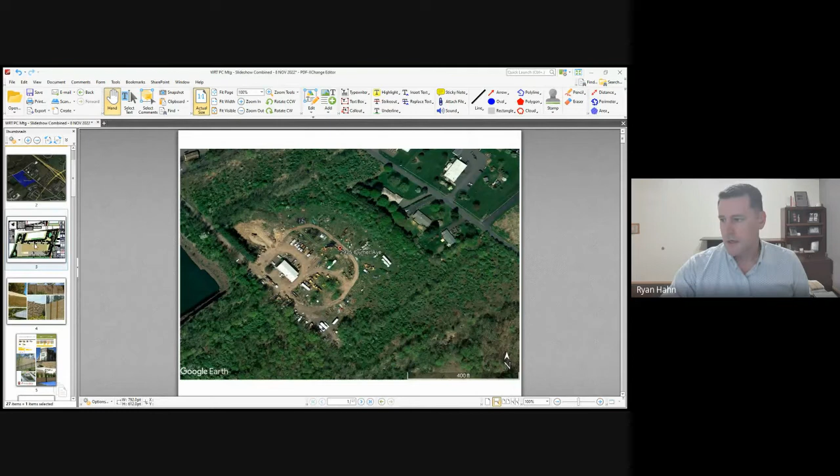So, and I'm sure it'll continue to be a hot topic of discussion, but just following our last reviews and discussion here, we've got residential uses to the east of us and to the north of us. And how do we enhance that buffering further? So I want to highlight two additional items here and how the outward appearance of this is relative to the township. So first and foremost, we're around this perimeter of the parking area on the east side of the site.

The SALDO requirement is to have a 4-foot tall berm with a 5-foot board-on-board wood fence. We previously showed and continue to show an 8-foot high fence around the perimeter. And I'll just illustrate that's not just around the parking, that's around this full perimeter. What was absent on that before and what's difficult to ascertain from these two-dimensional plans is the way the grades work here and how this site crowns in the middle and then falls off as you go towards Clymer and goes toward the south. So as a result of that, we were previously showing this berm, or the 4-foot high berm, extending a partial length along the residential homes here to the east.

The plan update that we've made since then is we've actually added some smaller parking lot facing retaining walls, which allowed us to extend the length of that berm the entire length of the parking lot. So I want to be clear that is on our revised plans, that will be on our revised submittal, and that's a commitment from us.

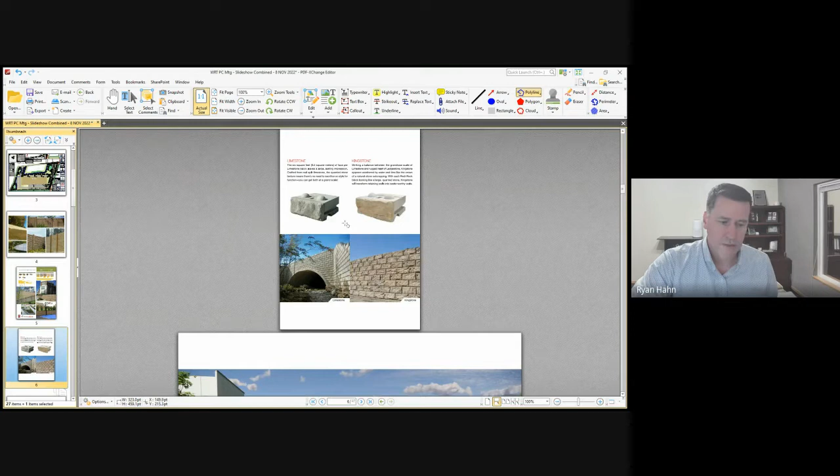I did want to throw out here in the meeting, especially as we get towards those walls, one additional option that we're open to if this is elected. What I've got up on the screen is what's called a Redi-Rock system. So in addition to the segmental block walls, this is a much larger module. This actually has what I consider a much better appearance once you get to 3 or 4 courses high, like shown, because these are actually the faces of 4 foot by 8 foot. So it looks much more like a cut limestone, locally sourced. So that's an option if that's of interest. But we'd be willing to put in a Redi-Rock wall along those higher elevations facing Clymer.

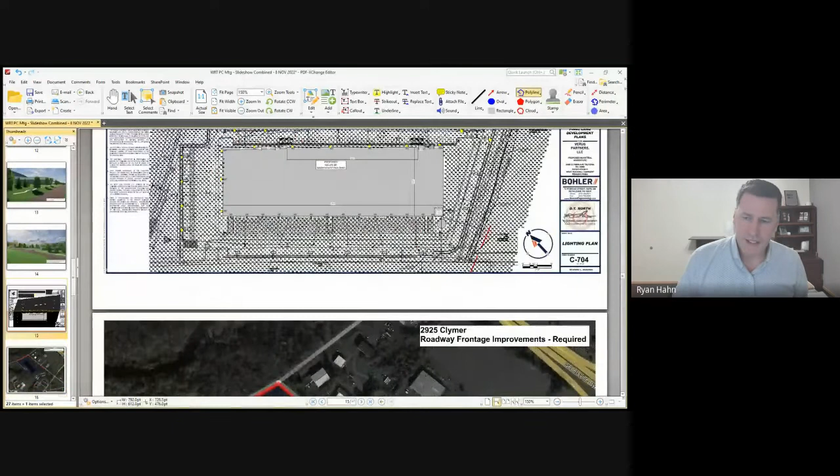I'll come back to those items in a second for your question, but we made some other changes just as it relates to the perimeter of this property that I wanted to go through. So the lighting plan, and I'm going to come back to these slides, the lighting plan on this property. So we've gone through several iterations, and where we started at the beginning of the year is what we felt was a compliant lighting plan.

All of these light fixtures had a horizontal type cutoff lens, and that's designed to prevent propagation of lighting across the property line. Subsequent to that, and in response to technical comments, we've added light shields to all perimeter lighting fixtures on these property lines, which not only helps stop any lighting propagation, but the glare from those fixtures is reduced.

Following our last presentation, I went back to our lighting designer. This is actually something that I learned was available out here, but how can we reduce this impact even further? And one of the things, and this is in that commitment as well, we've added in here what's called an nLight. It's by Acuity, a lighting control system. And what this does is, I've highlighted all the yellow fixtures that this would be applied to. What this does is this makes the normal operation of these lights at 25% of their full level.

Then they are actually triggered by motion, because our biggest concern about having the lighting was for security. These are triggered, whether it be vehicular or pedestrian motion, to their normal lighting level. So the normal operation, in addition to the cutoff lenses, in addition to the light shields, is to have these dim to 25% of their operation. And this is more than just an occupancy sensor on a lighting fixture. What this allows is that all of these lighting fixtures have the ability to be controlled instantly.

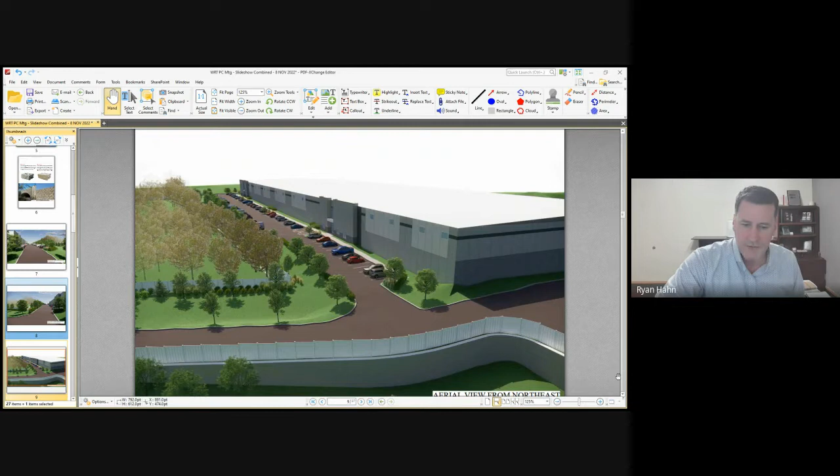We also created one, this is from the same location, but facing towards the southeast. So you can get an idea of how this is oriented. This gives an overall view of the parking lot, the location of the residences. Obviously the truck maneuvering, everything was oriented to the opposite side of the building.

This is the same view from the opposite side. So you can see that starting to angle away and where the barrier is relative to the existing and proposed vegetation. This one is actually from Clymer, just so you understand. This white line is actually the property line, right-of-way line. That's what that's intended to illustrate.

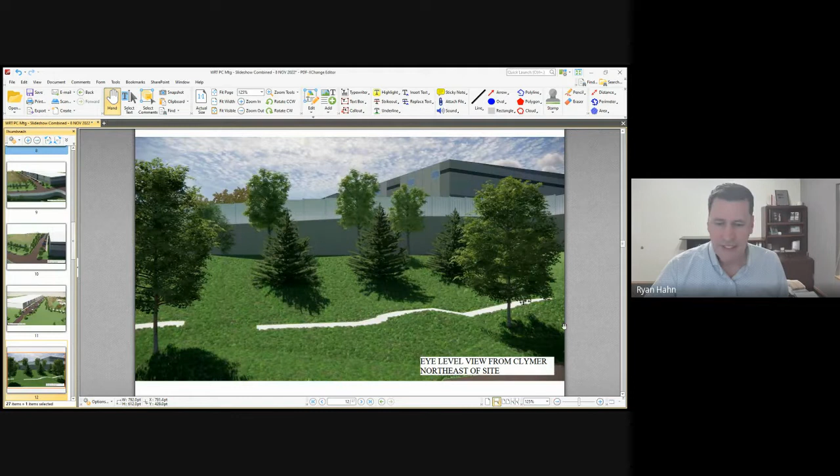So this is near the stormwater basin at the northeast corner of the site. This is looking down Clymer, so this gives a good idea of where that Redi-Rock wall would make a much nicer presentation along that perimeter along Clymer. I'll qualify these little humps here are an anomaly. Our intent is not to have an off-road course here on Clymer, obviously.

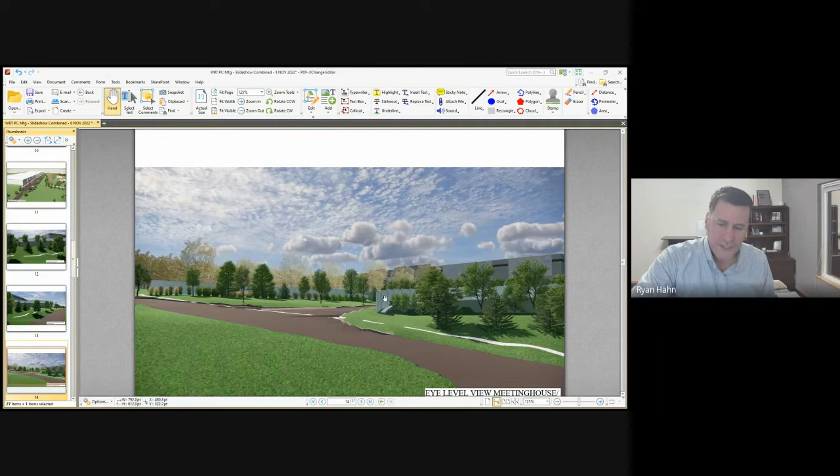And then the last slide is just an entrance elevation at the north entrance to our property, showing those two fence lines, retaining wall line, what this does screen, what this doesn't screen, relative to the roadway. So again, a lot to digest there, but I'll pause there just for any questions you have or comments.

I have none at this point. This is Alex, nor do I. Okay. The next, go ahead.

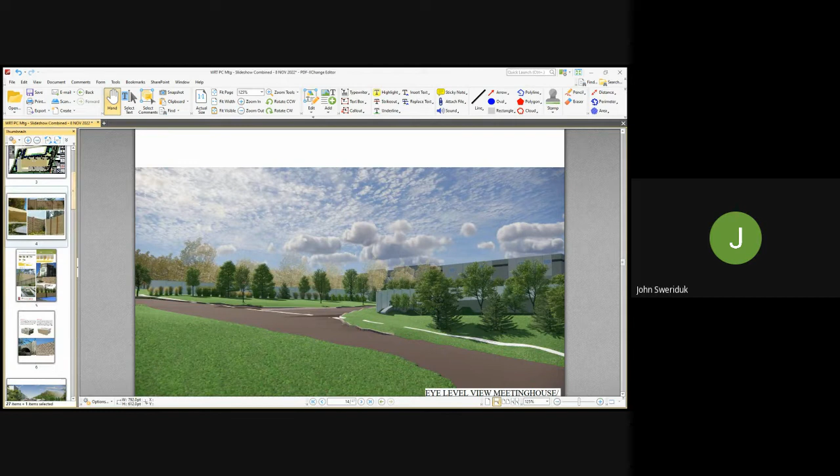This is John Sweriduk. The sound barriers that you're proposing here, are they similar to what we see along highways like the Pennsylvania Turnpike? They've installed a lot of sound barriers as they've been doing widening of the turnpike. I don't know if you're familiar with what product they use, but is what you're proposing here by any chance similar to that?

I don't know the specific instance that you're referring to. I can tell you that I know for a fact that the SimTek and the Plywall that's shown on here have been used by PennDOT in the past. Sometimes when you get into a taller elevation, 12 feet, 16 feet, 20 feet, we're talking about a different product altogether. It's actually a precast concrete with steel support posts. That's what I do see commonly when you get into the higher elevations along the highway.

The disadvantage of that is that you're limited, similar to the retaining wall block, in color selection. I mean, it's a precast concrete product, but I don't know if that answered your question. But if you have a specific location, I'd be happy to confirm that. It looks similar, and based on your description, it sounds like it's a similar product. Thank you. You're welcome.

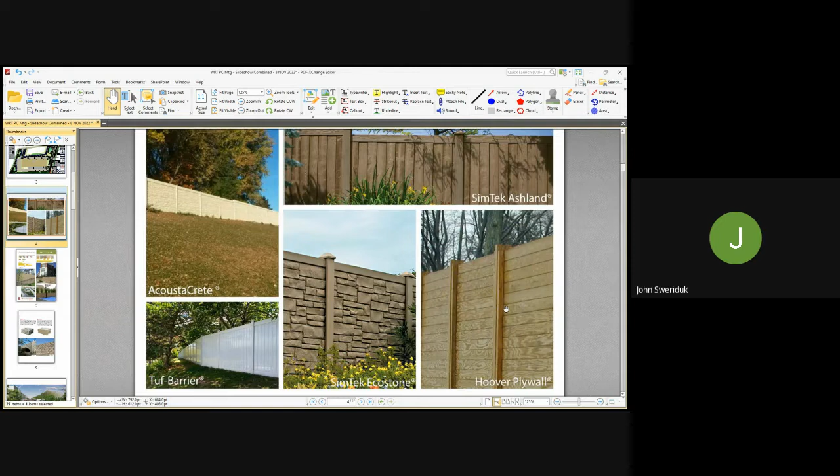The other item I wanted to talk about here, just because this has been a big topic, is an update on where we're at on traffic improvements. So just this first sheet, I wanted to highlight what is required by the SALDO, and it's the frontage improvements along this property line. Matt will hit on this later, but 3 of the remaining waivers relate to improvements along Clymer relative to the offsite improvements that we're showing along Meeting House Road and then the intersection at Meeting House Road and State Road 152.

So this is the improvements to the 14-foot wide cartway frontage along Clymer and then the 2 portions that are on Meeting House Road. So that's the requirement. This is an update on what we're showing in terms of the improvements, and there have been a few iterations since we last presented here. So we're showing, and I guess I'll start with Clymer. Clymer isn't being completely ignored.

We're removing the access point that's existing, where this property currently accesses Clymer. That's being removed in its entirety. We did modify the entrances on Meeting House, not only with an island, but signage. We don't anticipate any truck movements towards Clymer, but just to further discourage the accidental northbound turn exiting the property.

So that's been updated as well. And then along Clymer itself, there are 3 existing roadway culverts that run underneath Clymer along our frontage. We are replacing those culverts and then regrading the frontage to provide a 2-foot grass shoulder, and then regrade the drainage along the north side of Clymer. So there are improvements along that other than the roadway.

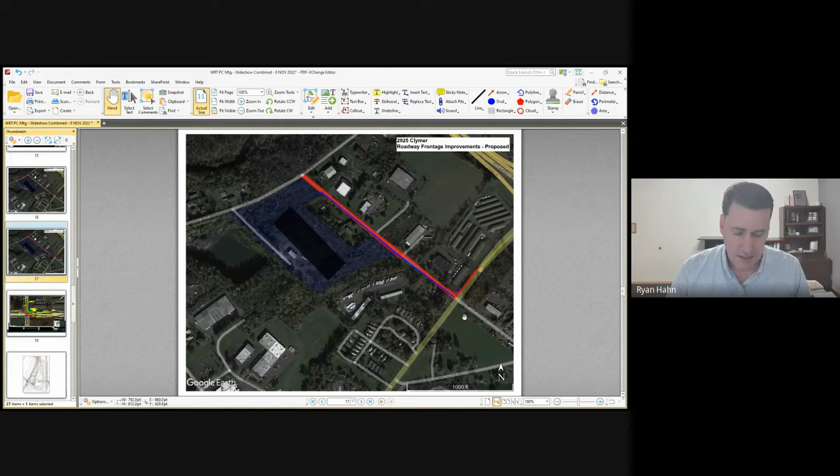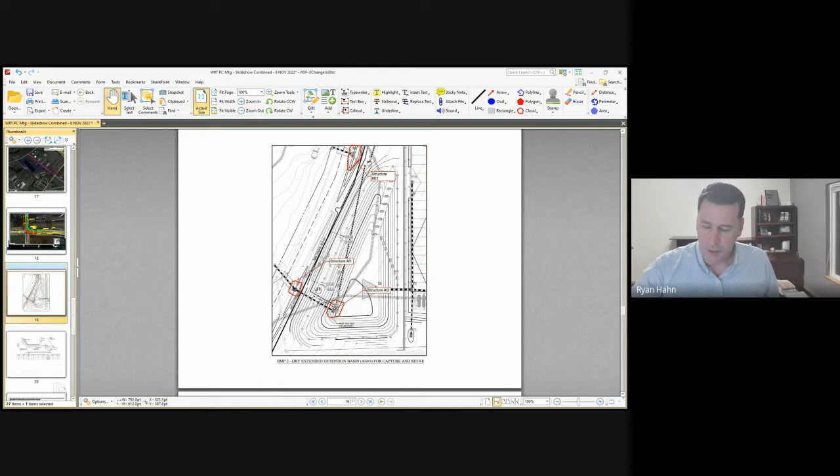Lastly, and I'm sure several of them will comment here tonight as well, but we've made multiple efforts to reach out to all adjacent property owners to this site. Obviously, we've had discussions with GA Peak, our neighbors to the west, the Vogels at Rock Hill Storage. Mr. DeSantis was kind enough to spend a couple hours with me and our engineer, Justin from Bohler, on reviewing his stormwater concerns to the north side of this property. Hopefully he feels the same way, but we had a productive discussion and we have proposed to him some additional improvements. I've outlined those there.

This is obviously subject to technical approval, but this includes adding capacity to the stormwater management basin opposite his property. So adding additional emergency capacity beyond the DEP or township requirements, adding some additional sumps to these structures and screens to these structures to prevent errant debris, leaves, things like that, potentially entering the storm sewer and coming across the roadway.

So I know everybody loves hearing a developer speak for a long time, but I guess with that, I'll turn it over. One of the comments was, what's the benefit to the township for this project? I won't dwell on this for too long, but I do want to have David Babbitt, just an outside consultant that we've engaged. David, are you here? I am. Can you hear me? Okay. Yes. So David performed, just to give a general idea, the perpetual fiscal impact of this investment in the property. But David, if you could spend just a couple minutes just going through that analysis, which we've provided as well. All right. I'm not sure if everyone has a copy of it, but there's 2 big spreadsheets.

This is for the township. The top panel shows the number of square feet, the assessment per square foot, $6 per square foot, which is based on comparable new distribution centers in Upper Bucks County. The assessed value comes out to about $1.1 million, which is a little more than 1% of the total assessed value in the township. The number of workers is projected to be 119. The annual township expenditures is projected to be shy of $14,000. In my view, that's a little bit overstated, but that's just a problem with the methodology. It tends to overstate municipal expenditures having to do with relatively small non-residential development.

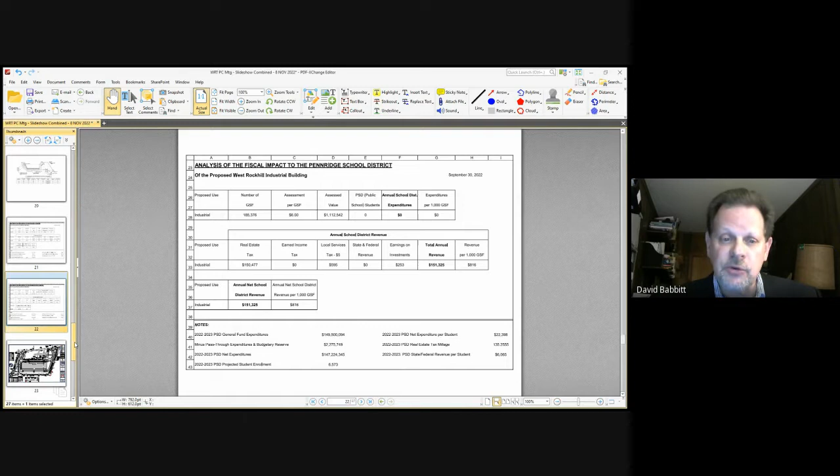If we can move to the school district spreadsheet, it has the same numbers on the top, except for the fact that there obviously are no school district students, so the school district expenditures are zero every year. The school district revenue, the vast majority of that is the real estate tax at about $150,000. The school district does get $5 per person, so there's almost $600 in local services tax revenue and some earnings on investments, about $151,000 annually for the school district. And obviously, since there are no expenditures, every dollar of that revenue annually becomes surplus. And together, we're looking at about $156,000 of surplus each and every year to the township and the school district combined. That's the brief version. I'd be happy to answer any questions if you have any.

I have none. Greg, these numbers work for you? As in, do they seem accurate to you? They seem accurate, somewhat accurate, yes. Okay, thank you.

Anyone have any questions? This is Alex. I don't. All right, why don't you continue?

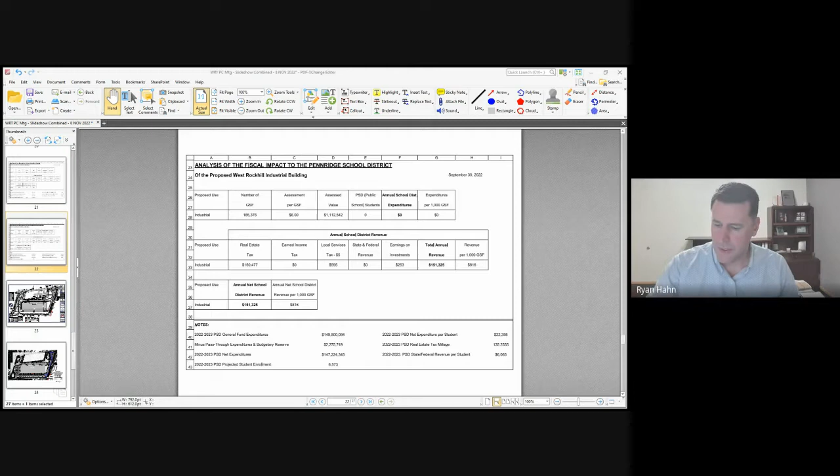Okay, and last but not least, Matt, if I could turn it over to you and just go through, I guess, the front end of this, the updated waiver letter. Sure. Good evening. My name is Matt Chartrand. As Ryan had mentioned, I'm with Bohler Engineering for the engineers working on this plan.

And as was mentioned previously, I think, when you saw this application come before you, we had a more extensive list of waivers that we were asking for relative to some unique spaces and issues that we had around the site. We've tried to work through as many of those issues as we could to reduce this number of waivers that we're asking for.

And we think that what we're asking for now, given what Ryan and David had gone through, with the positives that this project can bring to the township, we feel that this is the minimum relief that we would need in order to facilitate the development. So Veris Partners had put together a letter dated October 3rd that outlines those waivers. I'll run through them as quickly as I can. And then again, if there are particular items or discussion items that you want to go over.

There was also a letter that we received from Wynn Associates dated November 3rd, which speaks to some of those waivers as well, whether or not they were in agreement with, or if they had any additional comments. So if you have a copy of that, along with the waiver letter that Veris had sent over, that'll give you a better picture on what we're looking for here. So again, going back to the October 3rd letter that outlines the waivers that we're looking for here.

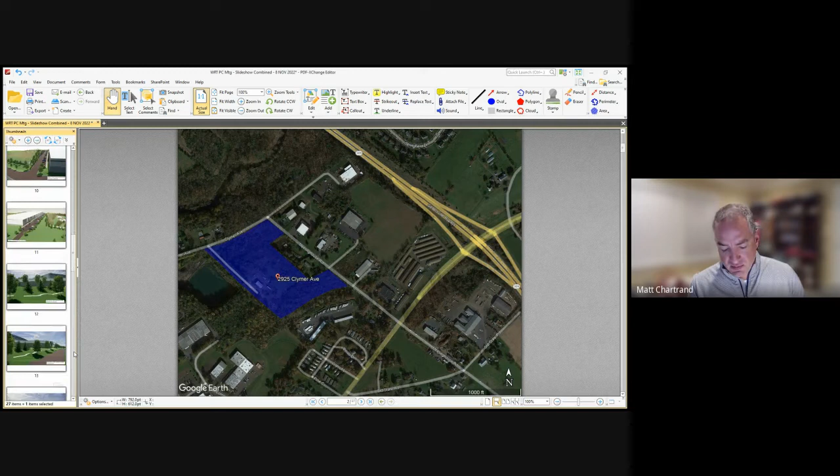Matt, can you hang on one second? Just going back to your first waiver request. I know we had discussion on this at previous meetings, and there was some geographical term that we were using that could be used to represent your property, and I forget what it was. I think Alex, you had brought it up. Yeah, that was LiDAR. LiDAR, that's the one. And I think we were willing to be accepting of that, if my memory serves me correctly.

Yeah, and LiDAR information provided via a GIS system, we can certainly download that information and bring that in. That would give us some elevations if we needed them, to certain offsite areas. And we do often look at that if we're trying to take a look at offsite drainage or things like that that might be coming through. We do believe that we've captured that within the area that we have right now with the survey and the information of what's coming there. So from our standpoint, we do capture that.

And on an exhibit, we additionally do have some of that LiDAR information. So again, we're not really looking at this as a situation where we're necessarily trying to cut corners. We just want to provide the information that's relevant to the site development itself. And we do believe that we have shown that within the plans. Okay, understood.

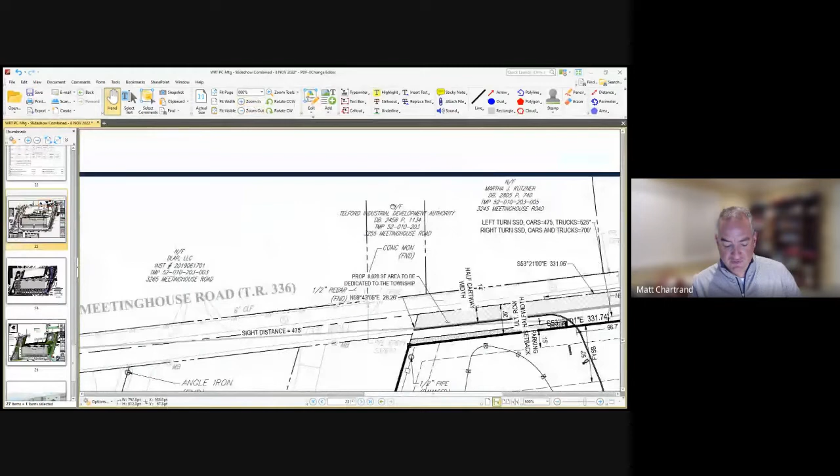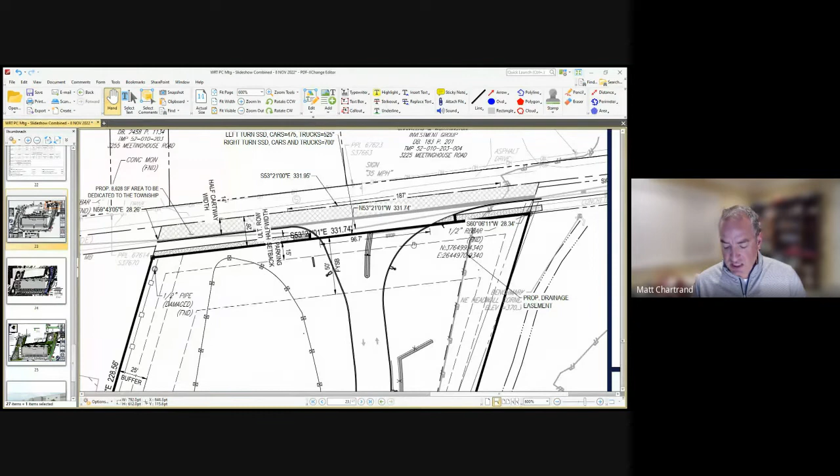The next waiver is a partial waiver from section 308.C. That's in the stormwater management ordinance, and that's from the requirement to provide storm sewer piping that's reinforced concrete and at a minimum of 18 inches. So on site, what we're proposing is to use a high density polyethylene pipe. This is more like a plastic corrugated pipe, and is very typical for use within these types of facilities. We use them in industrial facilities, commercial facilities, things of that nature. Typically reinforced concrete pipe we would use for sections out in state roadways where it's required. But for on-site, in terms of ease of installation and minimizing maintenance, the HDPE pipe is becoming more of an industry standard.

And then in terms of the size at 18 inches, basically everywhere around our site where we're conveying, say from inlet to inlet, we maintain that sizing, but there are some areas where our roof drains connect from the building where it would be smaller than 18 inches. And again, going from the letter from Wynn Associates, I believe that as well was a waiver that they recommended in terms of the size of the pipe.

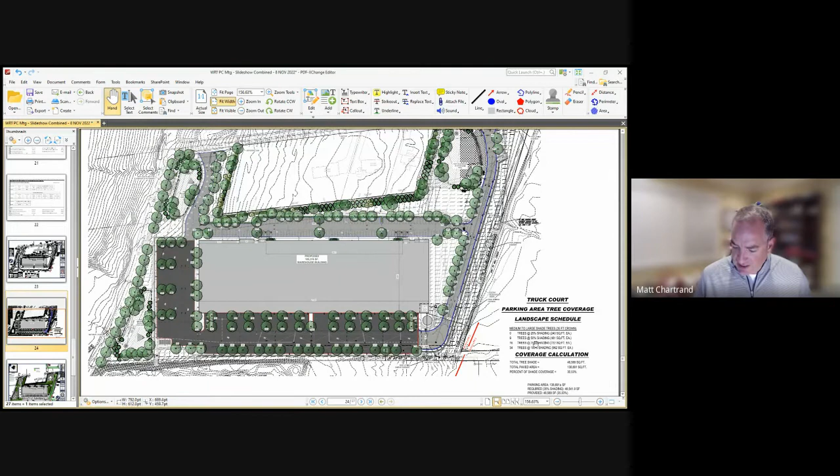Matt, how many trees are you actually planning to plant for the shading? Let me see if I can get to that. And I apologize, Chris, because I don't have that immediately in front of me here. Let me see if I can get to my landscape plan. Let's see if that calculation is shown on there. Sorry, it wasn't on the first plan that I pulled open. We have another plan within our set that specifically refers to the shading.

Yeah, I'd be curious to see where you are planning to plant them as well. I know we've given partial waivers on this before, but we've worked with the applicant to make their best effort to plant as many trees as possible to perform the function that they're being required to be there for. Sure. It looks to me that, in terms of the landscape schedule relative to shade trees, which would have a total crown of about 35 feet, we've got 48 trees that are being shown around our site right now. Overall, that yields a percentage of shade coverage of about 11.5%.

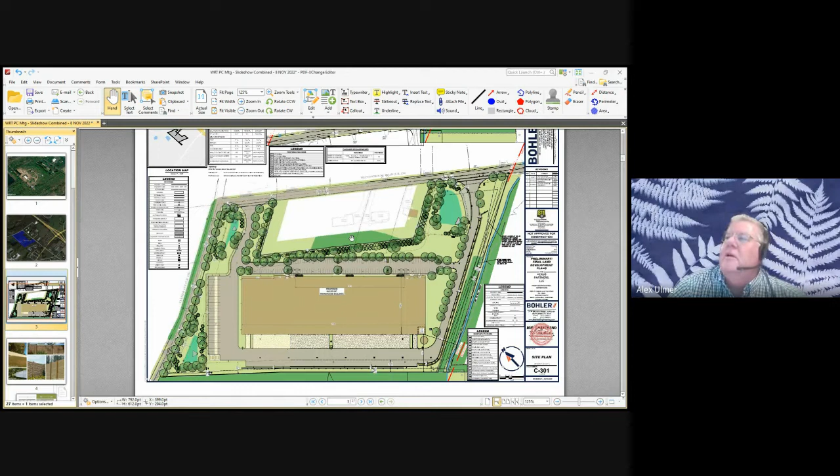I don't, and like I brought up, we had discussion about that, and it sounded like we were going to be all right with it. Yeah, I guess this is Alex. My only question is there a reason the LiDAR wasn't added to those areas within 100 feet of the property? I apologize. We do have LiDAR shown on an exhibit. And again, if there's additional LiDAR information that's needed in order to be able to cover that, we're happy to provide it.

Okay. So what I'm hearing is with the addition of LiDAR, that the planning commission is comfortable with the level of detail provided. Not hearing any objections to that. Yeah, we'll move on to number 2. I'm all right with it.

So number 2, similar to what Matt had discussed, is a combination of the road improvement question in general. So standard road improvements in the township are cartway widening, curb and sidewalk along frontage of property. As discussed earlier, what they're essentially asking for is a partial waiver to not install standard cartway widening, curb and sidewalk along Clymer Avenue, just do the shoulder and swale improvements, but utilize those funds to do a more complete widening and off-site improvements along Meetinghouse Road, essentially the entire length of Meetinghouse Road.

And as they indicated earlier, we have gone back and forth on this. I did meet on site with representatives from Bohler. So I think we made a lot of progress on that, and they're committing to the 28-foot width, the entire length. So I think that accomplishes what we had talked about in prior meetings for improvements for access to the site. So question back to the planning commission is, is that concept generally agreeable with the planning commission?

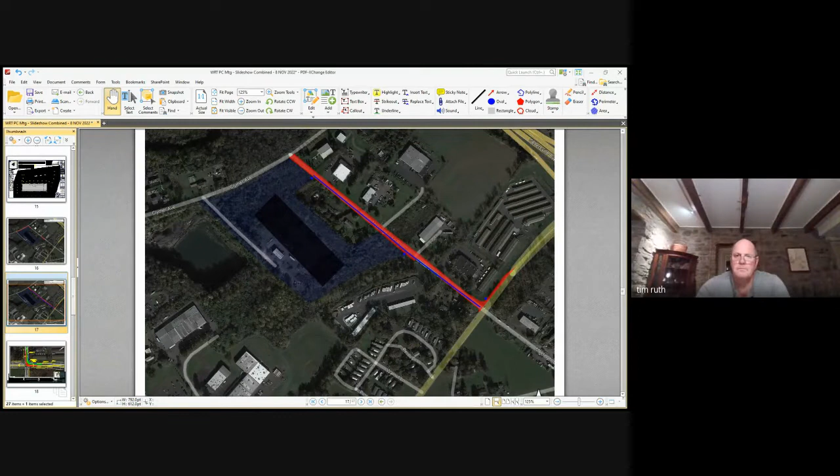Okay. Ryan, this is Greg Yeager. Ryan, sorry to chime in, but we've done that number in other projects. We have those estimates and they're on the order of 3 to 4 times the value of the improvements on Clymer. Okay. I'm not surprised by that number.

Thank you. So the width that was going to be choked down in front of the contractor services, that is now going to be out to 28 feet. Is that correct, Ryan? That's what you had indicated earlier? That's correct. There were actually 2 areas. There's the area where we had to modify that sanitary manhole that you and Adam walked on the site. I just wanted to make sure that was clear, that wasn't shown on the previous plan, but we would commit to doing that. And then there was a 26-foot width in front of these, just between the 2 driveways.

But you did provide some of the land development plans showing the availability of ultimate right of way. So we've since updated that to show the 28 feet as well. So the whole length of Meetinghouse from State Road to Clymer is going to be 28 feet. I believe so. That's correct, Matt, right?

That's correct. That's what we're showing. Right. Okay. Now, just so everyone's clear, it's not exactly a clean one end to the other straight 28 feet because we're working with what's out there. So sometimes it might shift from one side to the other a little bit. I doubt you'll even notice it when the job is done, but it's not just adding width to one side of the street and going entirely down. I worked with Adam to fit it in amongst all the improvements that are out there and make it work the best.

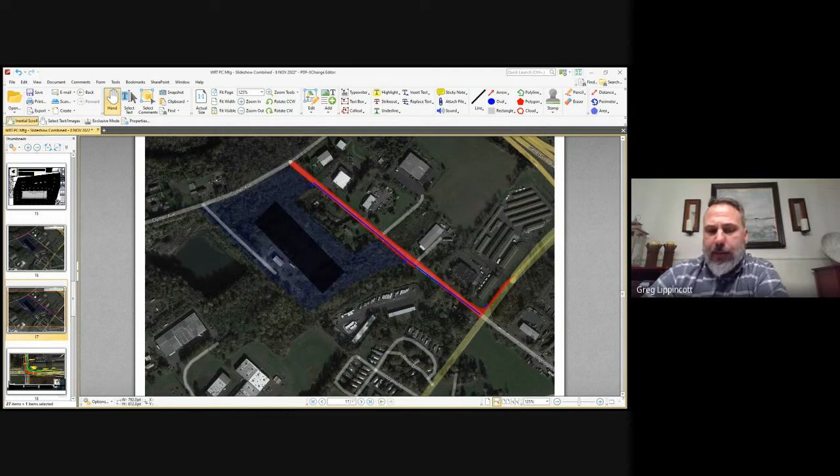We do not have a mandatory connection. If they sell their property, don't they? Or am I wrong? No, there are certain sections that do, but it's not in this section. There are sections like in the Ridge Road area for the sewer, but not in this area. If they had a failing or substandard septic system, when they would try to sell their property, they would probably have to connect to sanitary sewer. But there's no mandatory connection right now, or for water. Okay.

All right, and then I do have another question about a bullet point before. I don't know if you want me to ask this now or not. It would be directed towards Ryan, the concern about the lighting on the street. Can we wait till we get to that one, Tony, so we can finish this? I'm sorry. That's all right. Sorry, I jumped the gun.

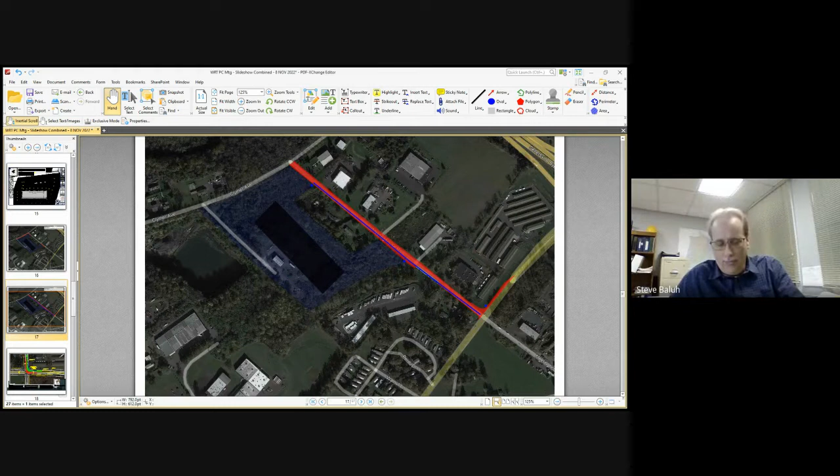No, not a problem. So are there any other comments regarding the street improvements or the partial waivers based on the extended improvements on Meetinghouse Road? I know we had discussion about sidewalk at one point. Does contractor services have sidewalk in front of the property? Yes, and I believe the last plan I saw, you were extending the sidewalk from contractor services down to the new entrance. To the southern entrance. To the southern entrance, yeah.

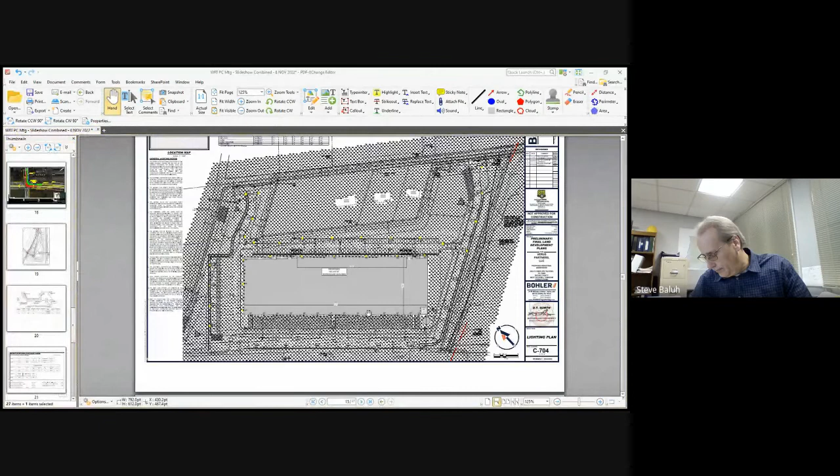Is that correct, guys? I believe we're showing sidewalk correct, and I believe we're also showing sidewalk on the north entrance. So you have sidewalk between the entrances as well? Not along the frontage of those residential properties. We are showing it along our frontage to that edge, and then widening of the road all the way along the frontage of those residential properties, again within the limits of what we're working with the right of way.

And then you can see in that kind of hatch pattern there where the sidewalk picks up again, and it does look like it ultimately connects to where the terminus is of the concrete sidewalk from the contractor services site. All right, so that would be sidewalk along the frontage of Meetinghouse, their own frontage, with a connection to contractor services. There is not adequate right of way to do sidewalk along the residential properties. Okay. All right, that's my last question.

Okay, I guess we should move. Oh, yeah. Is there another? Yeah, in my opinion, this is what we had talked about before, and this is what they're showing to us that we had looked for. So I'm comfortable with it. This is Alex, as am I. John, I agree. This is Andy. Sounds reasonable. Tim, I agree as well. All right, go ahead. Okay, Steve. I guess that's everybody.

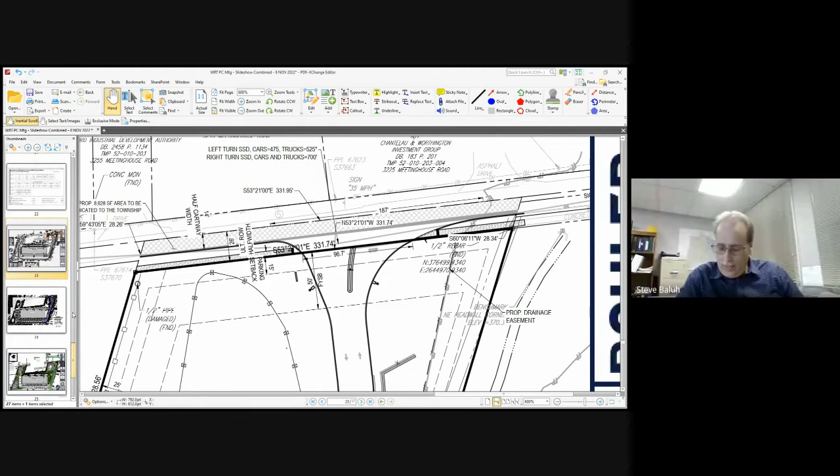So my third item is their item 5 from the Veris letter. It's a discussion of the 3-to-1 to 4-to-1 slope issue. I guess what they provided was an alternate plan grading the site at 4-to-1, which ultimately the change is that the retaining walls get higher, and they modified location of the truck storage, sort of flipped it from the outside of the loop road to the inside of the loop road. Correct me if I'm wrong, guys. That's more or less the extent of the changes on the site with the 4-to-1 slopes, correct?

Yeah, those were the primary changes that we made. It didn't affect anything else in terms of the parking or the building or the main truck court areas, but it did, like I mentioned before, and you just mentioned as well, Steve, just increase the height of the walls that we would need to place there in order to meet that requirement. Okay, and just so everyone's clear, what is Veris's preference? The 3-to-1 slopes with the original plan, or this alternate plan with 4-to-1 slopes?

Our preference is what we've shown. What this plan is intended to illustrate is that this doesn't affect the building size or the coverage. We would just do a slightly different layout. I think the positives, we get a generally more gentle slope on those basins, but it increases the footprint of those basins by nature of the slope, and then increases the height of the retaining wall. So that's what you have to balance here.

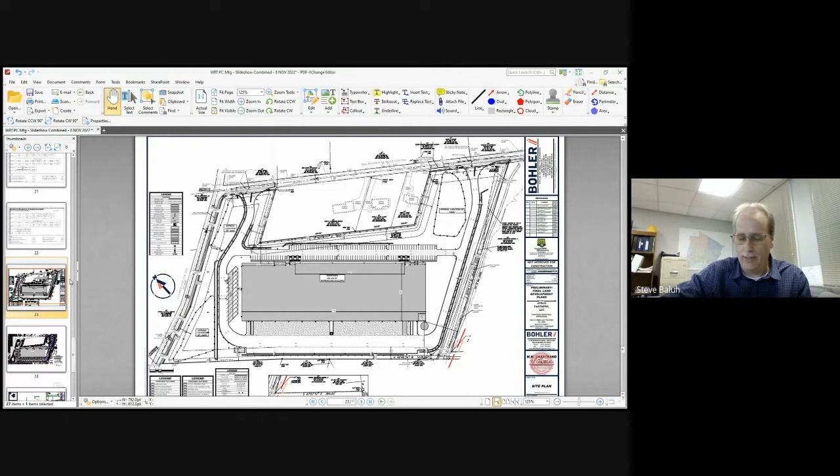Okay. All right, thank you. So I guess what we get back to is the question of, is the planning commission comfortable with them proceeding with the 3-to-1 slopes, with the retaining walls and structural engineering and the geotech report as we just discussed? Personally, I would rather see a lower retaining wall.

Could I just clarify there that the retaining walls grow in height with the 4-to-1 slope, not vice versa? Because that grade is shallower, so to make up that differential, we end up with a higher wall. Sorry to interrupt, but I just wanted to make sure that was clear. No worries. Yeah, thank you. So yeah, if I had to make a choice here, I would want a lower retaining wall. And seeing that they can build this within the ordinance at 4-to-1, I would opt to go with a lower retaining wall at 3-to-1.

I guess my thought, Chris, is they're still having to get a waiver for the height of the retaining walls. If they were to reduce the building size, could we reduce the height of those retaining walls? Even if it's not fully to ordinance, at least something a lot closer. I think that may also help with the afforestation issue. I'm not sure what you mean, Alex. That they don't need a waiver for the height of the retaining wall. I guess a ramification of the waiver is the height of the retaining wall. I thought there was a requirement for no more than 4 feet on a retaining wall.

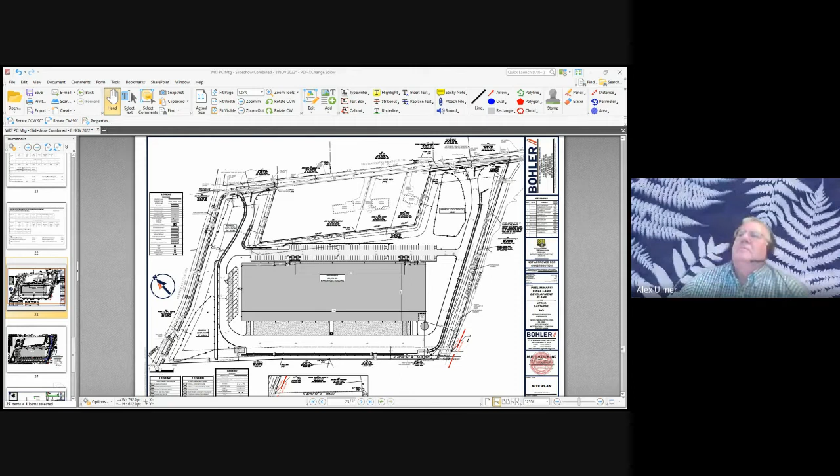So yeah, this is Tim. My thought would be if the site can be accommodated within the ordinance, but yet a waiver on the 3-to-1 versus 4-to-1 would be a reduction in the height of the retaining wall, I would be more for that as well. This is Andy. I agree with Tim and Chris on that. John, you have any? This is John. I'm fine. I agree with what was said. Okay, thank you. All right, Steve, go ahead.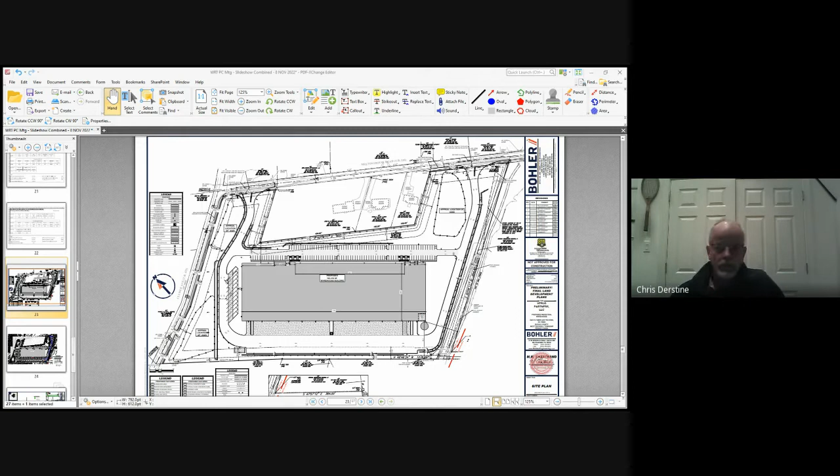Okay, that brings us to a much easier one. My item 4 has to do with the driveway width. I think they've proven they need the additional driveway width to make the truck turning movements, so the trucks aren't swinging out, blocking both lanes of traffic to get in and out of the site. That's essentially why they need those large return radii. Going back in time, I believe one of the reasons that we had these limitations on driveway entrance widths is so we don't end up with the old-fashioned gas station or convenience store that just paved the entire frontage of the site out to the road and people could drive in and out wherever, without controlled entrances.

So I think these are the smallest entrances that they could do and accommodate the truck traffic in a safe manner. Gotcha. Is everyone all right with that item? I am all right with that. Go ahead, John. I'm sorry. How do you discourage trucks from making a left-hand turn coming out of this exit that's shown?

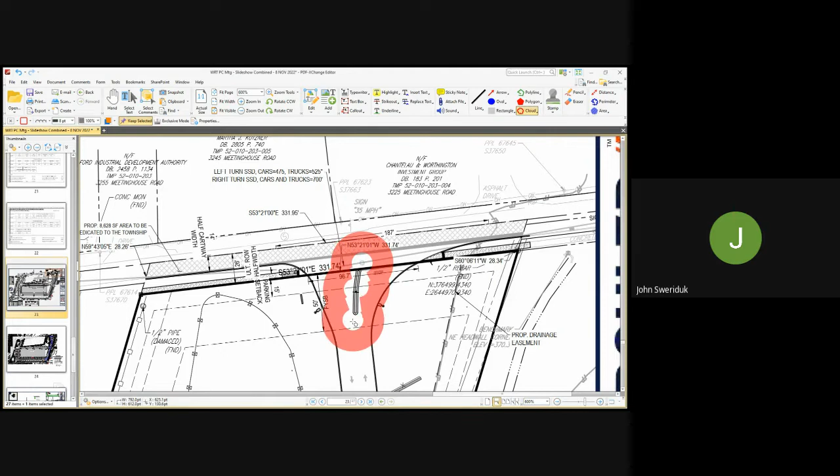Yeah, so you can see what Ryan just highlighted there. There is a mountable concrete island that's now placed between the incoming and outgoing traffic, and you can see that island itself is somewhat skewed towards sending the traffic to the right.

And obviously the curb line that follows as well as you're heading to the right allows for the truck to make a much easier turn and movement in that direction. Certainly, we think vehicles that are going to be servicing us and coming to this site will be coming off of the state highway and going back that way as well. So that's what we've done to try to facilitate that.

Obviously, there is still an ability, if needed, to make a left there. If it was vehicles or workers coming to and from the site, they would be able to make a left if needed. Emergency services would be able to make a left if needed. But in terms of truck traffic, we've really done everything that we could here to try to skew this and sort of encourage, if not force, the right turn movement.

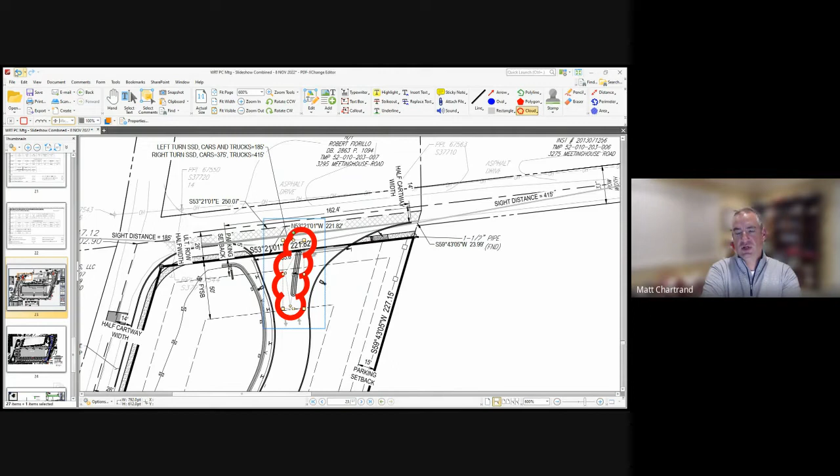Will there be signage out there that those trucks leaving can only make a right out of your facility? There is signage that's shown within that island. I don't know exactly what's shown on that post. Ryan, do you have any concerns about showing it as a complete restriction? No, and frankly, going that direction is a wrong turn for the trucks, so it doesn't benefit us to have trucks maneuvering that way either. There's no reason for them to be going that way. Unless the other way was blocked. Right. But I don't have a concern restricting that on truck movements.

Matt, are you still proposing that this is a 24-hour facility? Is that what you're saying? Ryan, do you want to speak to that? Yeah, we're proposing not to have a restriction against that, is the way I would phrase it. All right, so that would be a 24-hour facility. Okay. I don't know that the users will operate 24 hours, but in terms of a leasing restriction, it'd be consistent with the zoning ordinance here. So I'm not trying to mince words here, but it's just not adding a restriction to the hours of operation. All right, so we could say that it would be 24/7. Okay, and then I have another question too.

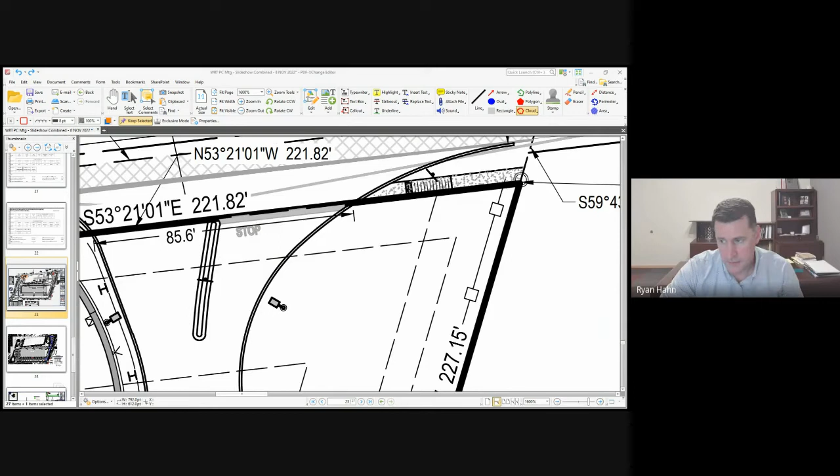In regards to the street lighting as well, we talked about this earlier, but the street lighting at those 2 entrances on Meetinghouse Road would be lit 24/7, is that correct? Yes. Okay, because we talked about earlier that there would be motion lights and such on the property, but the lighting would be lit at those entrances and cast light on neighboring property. Would that be correct? No, those poles would also have that lighting control. I mean, we have flexibility on that, but we propose that all those poles along that driveway would also have that. In addition to the shields, in addition to the cutoffs, they would have that light control system.

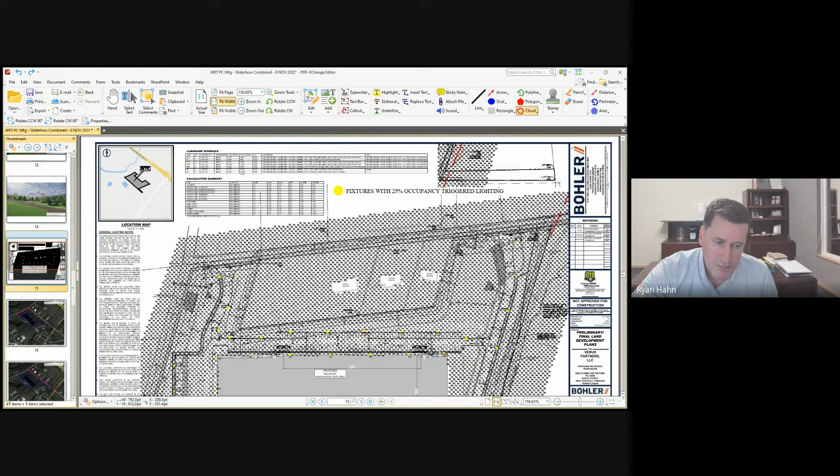So it's hard to see on this plan, but all of these yellow light fixtures. I mean, it's somewhat of a balance. You want people to be able to see the entrance and not miss it, but at the same time, recognizing any potential light pollution. But our going-in intent would be that those would be at 25% lighting level under normal operation.

Right, well, there's concerns with the residents that in the event that they miss the entrance, now they're continuing on down to Clymer Avenue and there's no improvements to Clymer, and now you got tractor trailers down there. That's always a concern. And that's why I was asking you about the lighting.

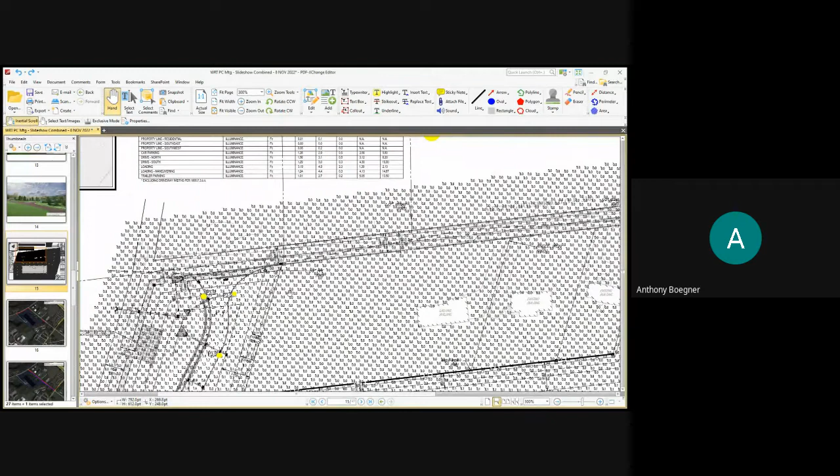If you wouldn't mind, I just want to clarify, because you mentioned the residents. If you zoom in even a little bit more on that driveway, Ryan, I just wanted to make note that the only area where there's even minimal light spill from those lights at the driveway is out onto the area of the entrance at Meetinghouse Road. So if you look to both the east and west, where our property boundary is to the residential property to our east, all of those values, now those are foot candle levels based on the lighting that's provided here, all of those levels at the property line are shown as 0.

So there is no light spillover from that driveway onto the residential property, and vice versa to our west. As you get down towards Clymer Avenue, you can see where those lights have all trailed off to 0 values there as well. So the only area that really would be lit is the area of and surrounding the driveway entrance itself. So I just want to clarify that, only because you made mention that there would potentially be spillover, not in any of those directions.

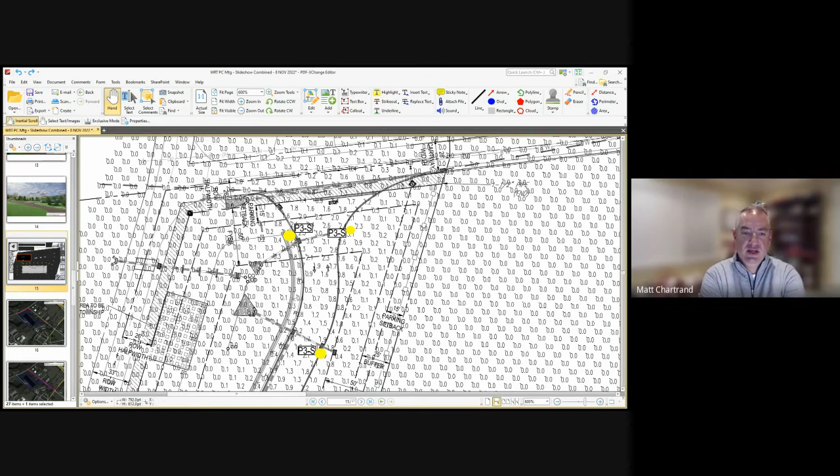And to clarify that, Matt, those numbers are based on the 100% lighting level, not the 25%. The beauty of this control system is the going-in assumption, and we're open to either, is that this would be at the 25% normal level. If it did become an issue, we could change one of these fixtures to 100%. We could turn it on, turn it off, or set it to certain hours of operation. That's an instantaneous change. It's not set it and we have to get an electrician out there to update it. It could be modified if it becomes an issue. But no, that's a good point, Ryan. Even those numbers shown there are based on the 100% lighting value.

Okay, and in regards to the traffic as well, in the traffic report I looked at, I just want to confirm that you're proposing 119 employees, is that correct? That's the modeled assumption. They base this on ITE codes for warehousing distribution. So that's what's modeled, yes. And frankly, that's what our parking is set up to accommodate as well. Okay. So the 119 employees are going to come in any direction, just for argument's sake. Correct. We don't know where those employees are going to be coming from. We know where the trucks are going, and it's to the interchange, but the employees, it depends on where the hiring's from.

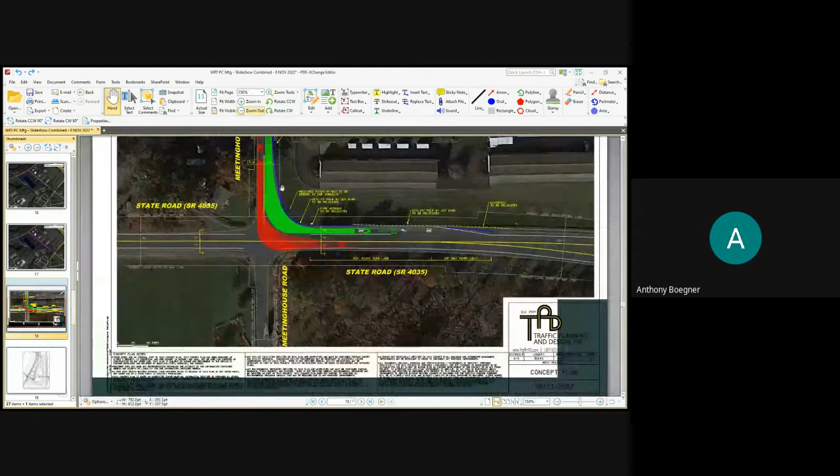Okay. And one other thing I'll leave you with is that the exhibits that you showed at Meetinghouse and State Road in regards to the traffic improvements, I looked through my packet. Were they submitted? Because I don't have them. This wasn't in the most recent packet. This was in a previous one, but I certainly can issue this concept plan if you don't have it. If you could, please. And just to clarify, this is Tony. Yes. Okay. And I have no further questions. Thank you.

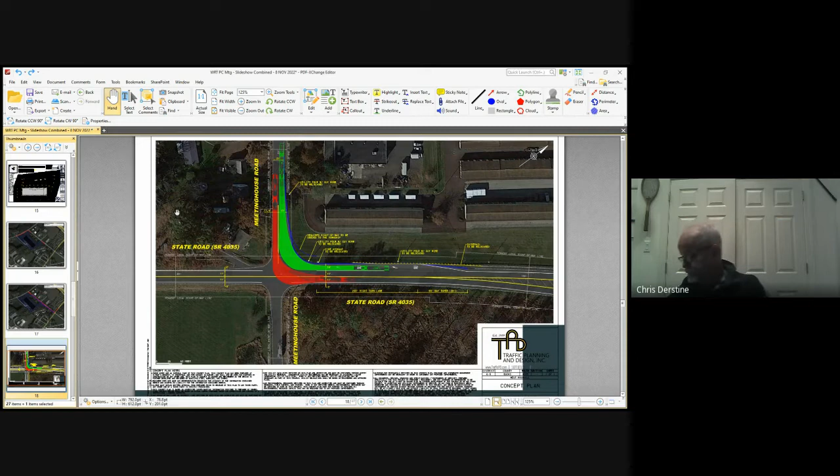All right, so we're still on item 6, correct? Yes. Were there any other comments regarding the driveway width or entrances and exits? I will take your recommendation on that, Steve. And I think with what we discussed with the mountable curb, the direct truck, and the signage, we could work out what the signage needs to be to restrict truck traffic. Those are beneficial improvements. Yeah, I would agree with that. I think a sign is definitely beneficial. I certainly appreciate the efforts with the mountable curbs. I think that'll help, and I think a sign would really help to seal the deal. Anybody else? All right. This is Alex. I agree. I think the signage would be important on that.

All right, why don't you move on there? Okay, I'll move on. And I guess I'll just add one more comment here in between. I realize we're picking these off one by one, and in the end, you're going to have to look at this as a package arrangement. But for the purposes of getting all our comments in, I think it's okay that we keep going one by one on these, acknowledging that sometimes things overlap.

Like Tony just said, the lighting sort of overlaps the entrances, overlaps the buffering of the neighbors, and everything will work together. That's why I didn't stop Tony. Yeah, it's kind of homogenized throughout.

So the next items, which were 7 and 8 on their letter, all have to do with stormwater management. These are issues that we have granted for other industrial developments, and not to let the cat out of the bag here or anything, but the stormwater ordinance that we recently updated like a month ago actually took care of some of these items. So our ordinance now is more geared toward meeting the PADEP best management practice manual.

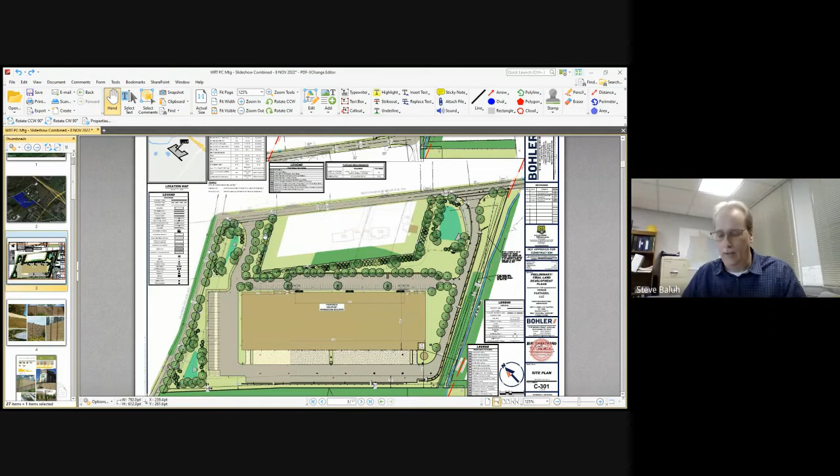The next item gets back to the trees, the parking lot shading. I think they went over that well. They showed the exhibit of where the trees would have to be. I think everyone could agree you can't plant all those trees in the truck area of the parking lot. On prior projects, we have asked for that calculation of what the maximum trees would be. They've provided that. They've provided what the equivalent cost would be. We've done a few things in prior projects we've asked them to install elsewhere on the property, but with some of the other discussions we had, there's really not a lot elsewhere on the property to plant trees.

So it was 111 additional shade trees was the deficiency. And correct me if I'm wrong, Matt, but you're providing... I apologize, Steve. You froze up on me right after you started to say, correct me if I'm wrong. Okay. Yeah, my question was, are you meeting the shading requirement in the vehicle parking area? And we're really only talking about the deficiency in the truck parking area?

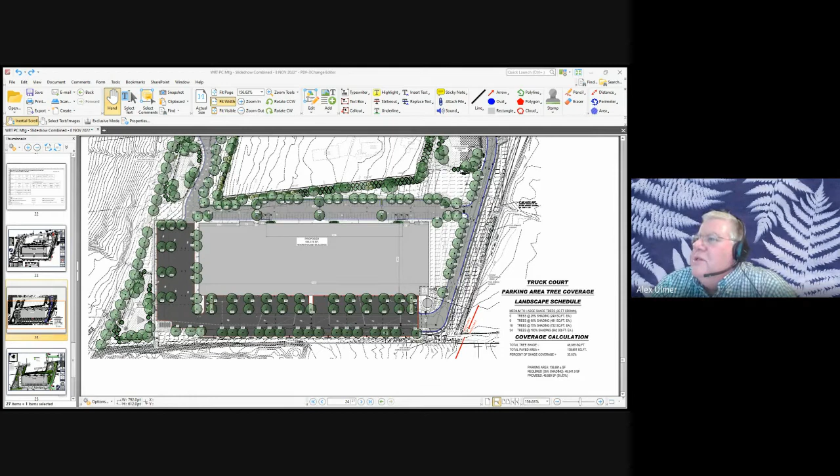Steve, this is Alex. The original intent of that was to reduce heat islands or to cool stormwater before it gets discharged? All of the above, yes. It was a stormwater issue, it was a heat island issue, a low impact development kind of thing. Would using some green roof be able to offset that? It would certainly offset that issue. I would just comment that we did change this roof from a black EPDM to a white TPO, which goes in conjunction with reducing that heat island effect.

And this is a sloped roof, is that correct? It's a gabled roof, so there's a center ridge line, half drains towards the auto and half drains towards the truck court. Okay, right. It's not a large flat roof. Yeah, so probably not so suitable for greening then.

This is Andy. This is the one that I struggle with. I mean, at 48 trees that are in there and 111 not, that's 30%. So, that was a decision that was made here. I mean, it's not close. So I'm looking forward to more discussion on this to hear what we could possibly do. I see what's going on. Obviously, you can't put the trees in the middle of the truck bays there, but you know, the requirement was 35%, and it's 11 plus. 11 and a half.

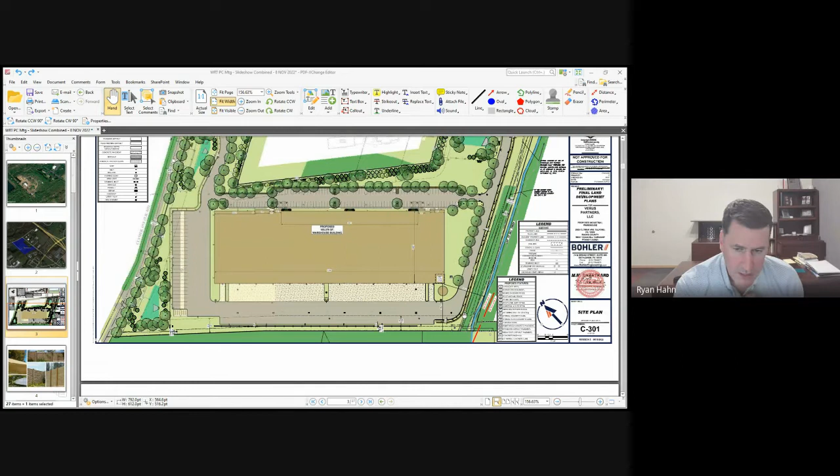On the north side, in the parking area, we don't have a wall directly there, so those trees can be placed within those areas. And just to piggyback on that, Matt, on that south side and specifically that southwest side, this is preserved woodland area just outside of that retaining wall. So this goes up to the existing flow line that comes across between us and Rock Hill Contractor Storage. So it wouldn't make sense to clear trees to plant trees there; we preserve the existing woodland along that corridor. Right. That's a great point, Ryan. But again, not something that we can take credit for in terms of a percentage calculation, but that is being maintained and would provide additional shading for what's there.

I was just looking at the ordinance while we're talking. You could take credit for that if those existing trees are close to the drive aisles on that side. You could take credit for those towards your shading requirement. Does it have to specifically overhang the? It has to be in the vicinity. I mean, if they come as close to the driveway as you would plant a new tree, I think you could get some credit for that.

Okay. Well, I'd say we can go out there and look at individual trees and try to see what is being saved and what that comes out to. It may increase that percentage minimally from what we had before. But I think the offer stands in terms of what was presented. Again, we're not looking for a reduction there. Ryan, correct me if I'm wrong, but we're trying to do as much as we can with what we have.

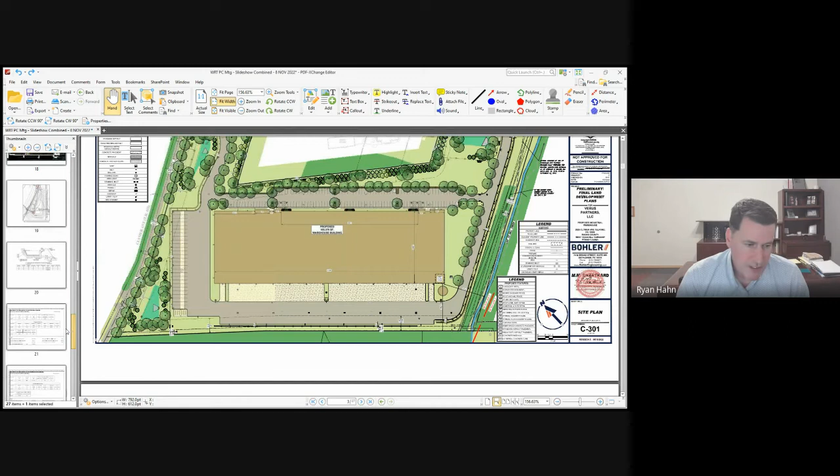Yeah, and I guess I'd make one more bullet point on that. This is an industrial use. So you've got a truck court on the back of the building, and by its very nature, you need truck maneuvering area. This is an industrial use by right here. So where the relief is being sought is whether or not this truck court is this entire size or half this size. You can get the idea. The percentage is still the same. So maybe the quantity gets bigger, but that's where the challenge comes in.

But we are certainly to the south and west, and even to the east, where we have those retaining walls there. That does encumber our ability to place more trees within the area. But Ryan brought up a good point that along the southeastern corner of the site where those existing trees are, we'd have to tear trees out to put new in. So I don't think that would solve much. And again, it would be mere percentage points, but we're not going to be able to get close to that 35 overall percentage number. So hopefully the township can see that we're not trying to skirt a responsibility, other than to make it functionally work as best we can.

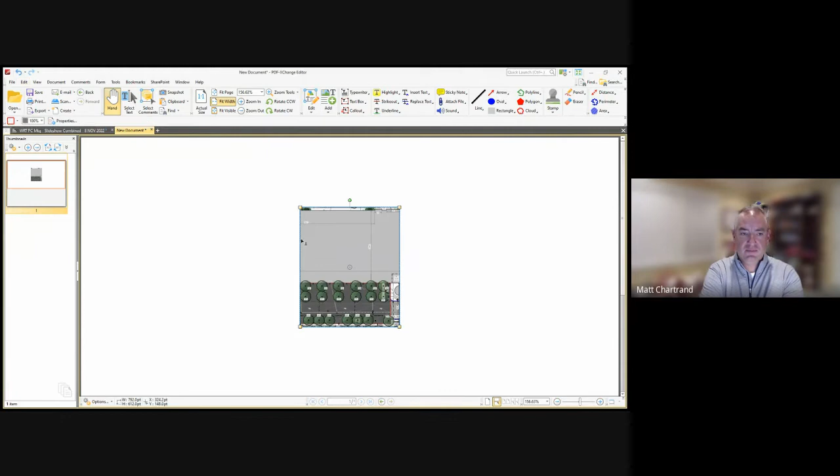But it is an ordinance requirement. I would agree with what Greg is saying, that because it's a percentage of paved area, it really isn't driven by the building size. It's driven by any paving that we have, so drive aisles and so on. But anything lining those drive aisles, we can only take 50% credit for the shading from that tree. It's just a percentage working off of that. So even if the truck court or paving areas were reduced, it would reduce maybe the overall number of trees we needed to install, but it wouldn't likely reduce the percentages from what we are showing.

It would provide more area to plant more shade trees, though. Right. For example, in the back of the building, if you took that pavement back off that western edge, you'd have a row where trees could be planted that wouldn't infiltrate the retaining wall, undermine the pavement, or die because they didn't have enough room to grow. You'd have a whole row of trees around the whole back property line. I would respectfully disagree that the shading is over the pavement area. Regardless, you get 50% of a whole line of trees across the back property line. Should be a lot closer.

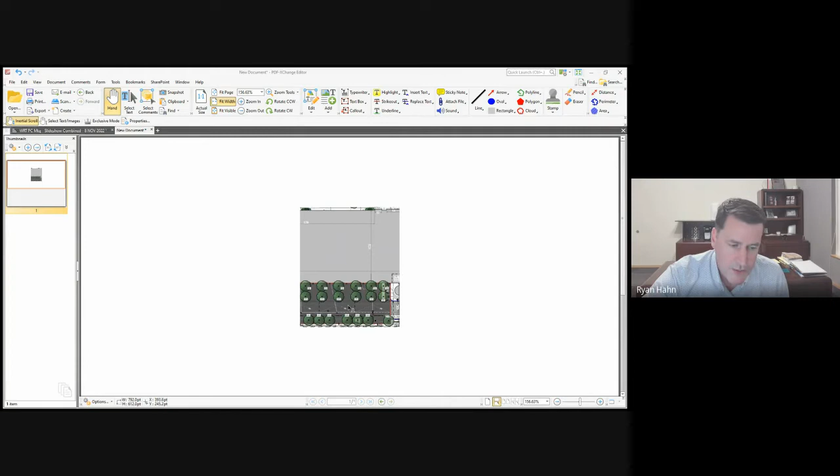Yeah, but you need 130 feet to maneuver a truck on a warehouse distribution use on the property. That's the point we're trying to make. But Ryan, if you took the 130 feet off the building, you'd have the room. So in other words, we have to have 130 feet of pavement to maneuver a truck up to the building, whether it's 10,000 or 20,000 square feet. That pavement area, the length of the building times 130 feet, we have to get 35% of it covered with trees. Regardless of how big that truck court is, you're trying to cover it with 35% trees. Planting trees off the property doesn't count towards our shading.

I think the concept the planning commission members are trying to explain is that if your building size was reduced far enough, you'd still have your 130-foot width of parking lot, but it would expose more of the southwest side of the property to allow for planting along the whole edge of your truck parking area. So let me ask the question: if we plant shade trees off the pavement like this, that would count towards the parking lot shading then? Is that right?

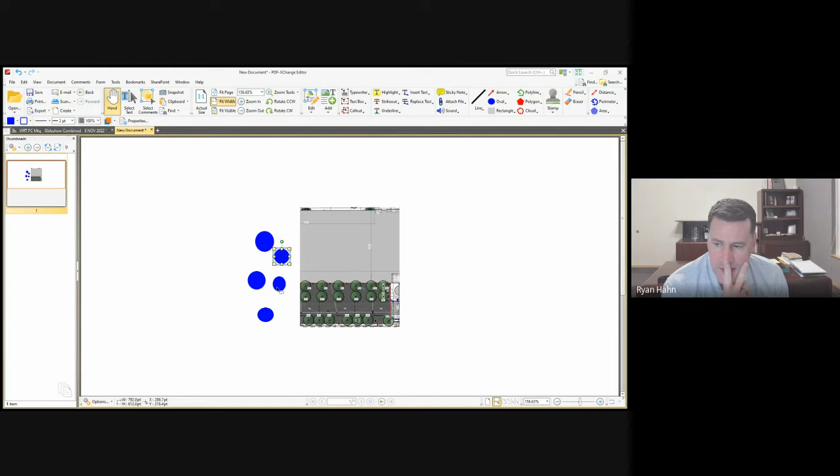I would assume 50% of the tree would, from the conversation I've been hearing. I think that's only if it's right up against the pavement. Correct me if I'm wrong. And that's what I'm suggesting. I'm pretty sure that's what our planning commission members have been leaning toward.

If you took 20 or 30 feet off the building and shifted the whole pavement back 20 or 30 foot towards the interior of the building, you would then have a 20 or 30 foot strip along the whole south or southwestern property line where you could plant a line of trees all the way down it and only have gaps for the lighting. And you could take 50% of each one of those trees.

Now, would you get to 35%? I don't know about that, but you would be a lot closer to 35% than 11. That's my point. I understand your point. That's just my point. I think that's the point that we all have in the back of our mind.

I mean, we've definitely waived shade tree percentage, but we also expected an effort for the maximum number of trees that we get on the property. And the percentage that we've waived in the past is a lot higher than what you're showing us. It wasn't our ordinance, we still waived some trees, but it was a lot closer to our ordinance numbers than what you're proposing.

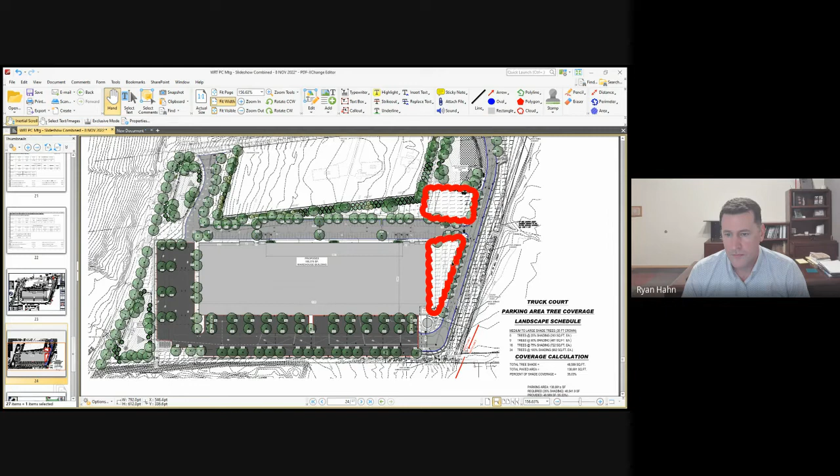I'm getting the distinct impression that we're not coming to a general agreement on this one comment. Maybe we move on to the other comments and leave this one for the moment with an understanding we're not at an agreement. That's fine. Yeah, let's move on. Well, the next one happens to be trees also. So that's the afforestation requirement.

They showed an exhibit on the plan that had the medium green or gray green shading, that they could do afforestation on the property if they filled in essentially all the spray irrigation areas with the tree planting that would be required for afforestation.

Just as a note, both these sections of the ordinance, the parking area trees and the afforestation trees, have the options written into the ordinance. It's at the discretion of the township, but it does write in the options for contributions for trees or planting trees in other locations in the township. So their offers are in line with that. Their offer was they could do the plantings in these areas or they provided a contribution estimate in their response letter.

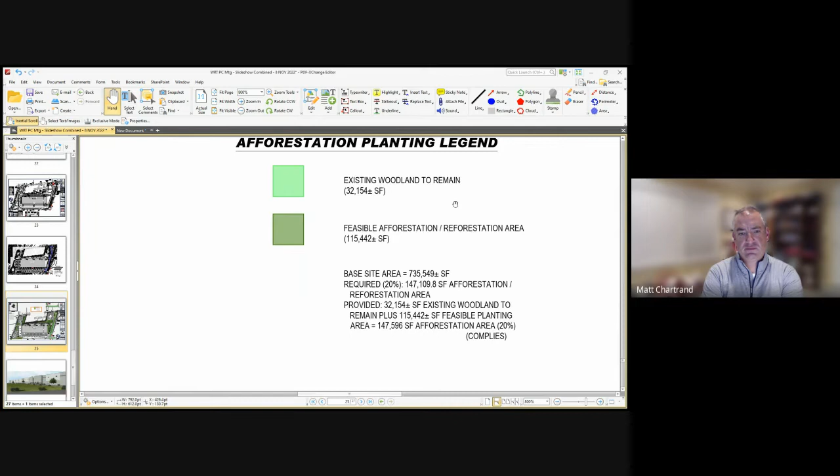Can that exhibit be sent to Greg, please, as well? I think that's in your packet. Sure. Yeah. Yeah, I don't know if you got it in color, Tony, but that was Exhibit B attached to the Veris letter that I think I included when I sent you my letter.

Yeah, those two numbers, the light green and the dark green, come up to like 20.06% of the total property. Yeah, that would be right. 20% would be the minimum. 32,154 plus 115,442 divided by the 735,549 is like 20.06.

So in that instance, it's almost like the slopes thing with regard to the height of the retaining wall. The fact that they can do it on the property, I'd be more inclined for that one, if there's going to be a contribution, they have the ability to do it on the property. Like you said, Steve, do we want that? Is it really the ideal situation? Probably not, but they do have the ability to do it. So therefore, that might be a more reasonable situation in my mind.

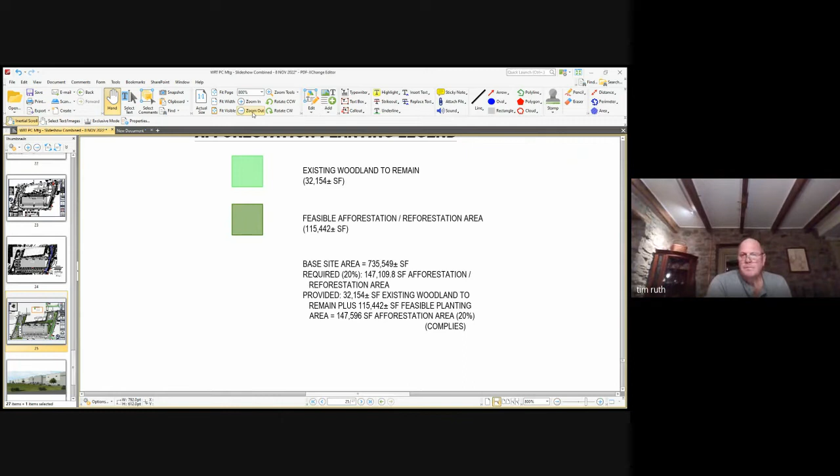Yeah, Tim, I see where you're coming from there. I'm trying to read this plan. I need better glasses. I can send a bigger version of this as well. So you don't have to, yeah. You need a bigger screen.

So on your legend there, it says that the light green is existing woodland. Right. Existing woodland down at the southeastern corner of the site right there. So that's an existing wooded area that we're going to maintain. I'm sorry, can you point it out? Ryan can. He's circling it there. Okay, so I thought that was an afforestation area. No, it's the other green, the darker green, which basically covers everything else. Right. Okay, well, that clarifies a little bit for me. Thank you.

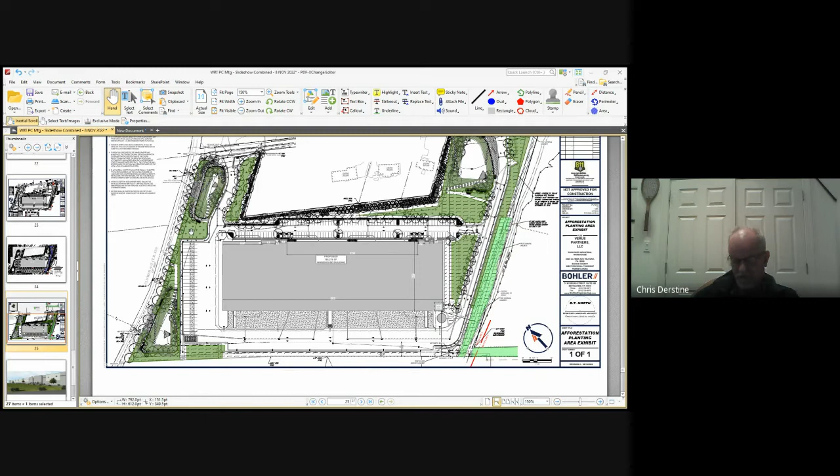So along that waterway, between you and contractor services, you'd have afforestation intermixed or alongside the existing woodlands. And there's going to be little saplings. Is that how that gets done? Yeah, under our ordinance, it's not planting 2 or 3 inch trees. It's planting the little saplings and protecting them and letting them grow up to create a natural habitat. Right. That's the concept, anyway.

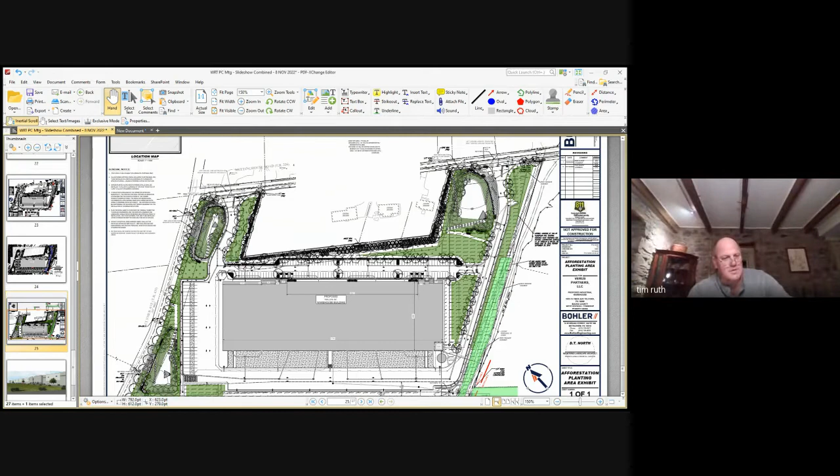How often does that work? Like on Augustine Road. Right. So if you take Augustine Road, it works about 40% of the area that we plant. Yeah, that's right, Tim. That is the example. Well, I think the deer tore into that. Yeah, that's what I'm saying. Is it the best situation? The fact that they can do it is demonstrated, but is it the ideal situation that we want? I would tend to think it wouldn't be. It's not an ideal circumstance for that type of planting. Like I said, they do have the ability to do it on site, and in my mind, that becomes a little bit different situation than the shade trees. Yeah, I agree with you, Tim.

Any other comments, thoughts? This is John. With regard to this and also the issue with the parking lot shading, a tree in a forest becomes part of a woodland habitat. A tree where it doesn't belong just becomes an eyesore that eventually dies or gets cut down. I'm all in favor of enforcing the ordinances for the good of the township, but planting trees where they logically don't belong for the sake of meeting the ordinance, I'm struggling with that.

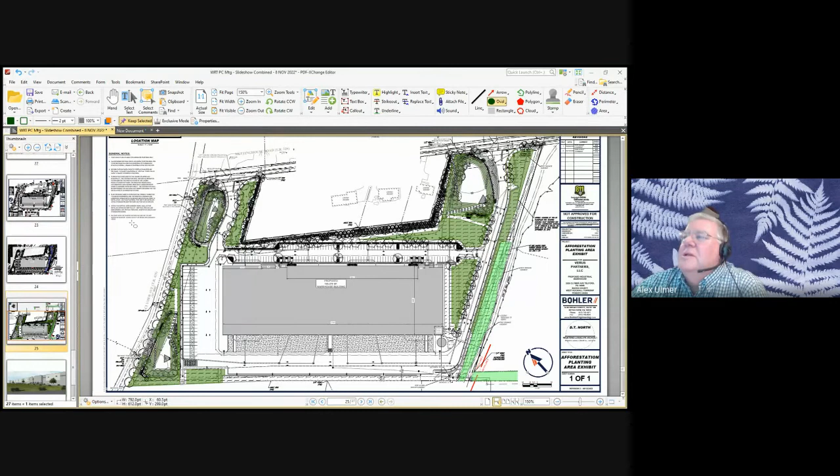Yeah, I'd also agree with Steve that if they were to plant up everything around the basin, ultimately it's going to cause far bigger problems with leaves jamming things up than from not having the trees in this location. Right. Yes. And that coupled with if the trees do grow, they can tangle in with the spray irrigation infrastructure.

Chris, may I ask, is there going to be a property maintenance person over at that facility 24/7? Because as you mentioned about the spray irrigation, that's been a thought in my mind: in the event of wintertime, freeze thaw, whatever, who maintains that? Because as we know, it goes into the detention basins, and then if it overflows, it goes across the street to Patrick DeSantis' property or the Vogel's property.

Is there a property maintenance manager? Because at one point in time, I thought I heard that somebody was going to be there. It's just a question. We're going to engage a full-time property management firm. That doesn't mean somebody's full-time stationed at the property. The occupants of the property would be there just like any other business. But we would, in addition, have a property maintenance service, whether that be a CBRE, et cetera, that would have a property manager that regularly checks on the property and responds to emergency calls.

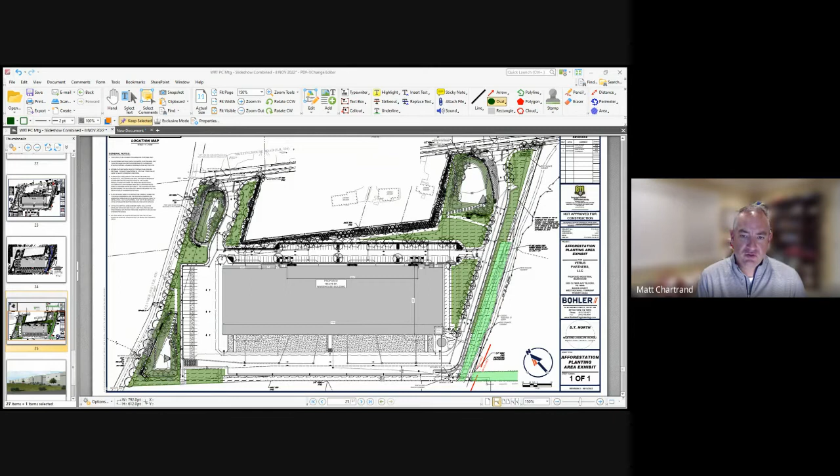The one thing that I would add on top of that is that as part of our NPDES requirements, which we'll have to obtain, obviously, the NPDES approvals associated with this, there are operation and maintenance requirements to all of the stormwater BMPs that are going on site. So in terms of checking to make sure that inlets are free of debris after major storm events, there are regular requirements listed on the NPDES permit and the plans that do require that. So that's kind of an additional belt and suspenders to what the township requirements would be from an operation and maintenance standpoint, but the NPDES does require that as well.

So there's somebody you have in mind that's local to be able to monitor this facility? Would that be correct? Yes, but I don't want to create the illusion that they're actually working out of this facility, via a local property management firm. What would be their time frame? Like if one of the detention basins overflowed, there was a problem, what would be the time frame roughly? And I wanted, Matt, if you could, after this, just speak to overflow. I don't want to create the illusion that just because the pump is getting repaired, this all of a sudden floods the property on the redundancy.

But in terms of the time frame, to me, it would be somebody that's within a 30 to 45-minute radius max. Not that it's not something that needs to be addressed, but the bigger issue is if we have a fire pump flow or an emergency such as that that needs to be responded to in the night. We have to have somebody that can respond to that quickly.

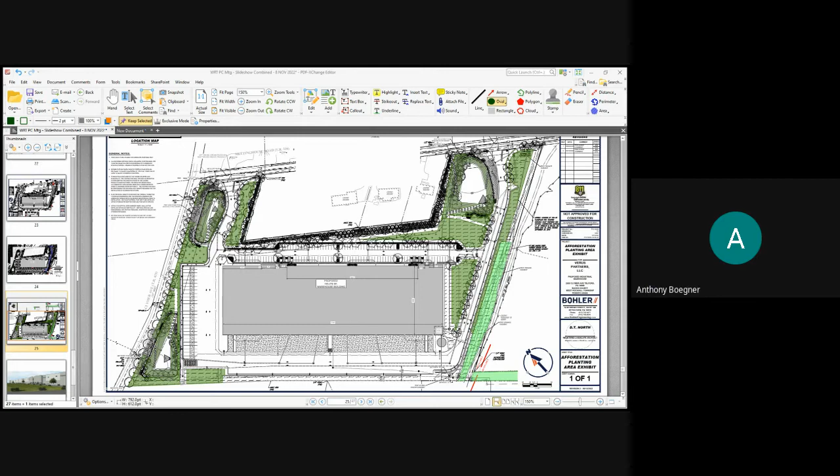And just for clarification, on all these stormwater facilities, on any of our new development, they sign an operation and maintenance agreement with the township. Not that we're out there doing regular inspections, but oftentimes after storms, we do inspections. But if the township got a complaint, we would then contact the developer, or whoever the maintenance people were, and if they didn't act, the township would have the ability to do an emergency repair or emergency action if they needed to. So that's one sort of backup system the township would have.

Yeah, and I guess for Ryan's earlier point, there are a lot of factors of safety built into the stormwater design as it relates to the amount of additional storage above what would be the maximum requirement, which in most cases is the 100-year level storm. Obviously, you guys are well aware we get more and more of the larger storm events. So we want to make sure that those facilities can operate and fully function under that type of stormwater flow.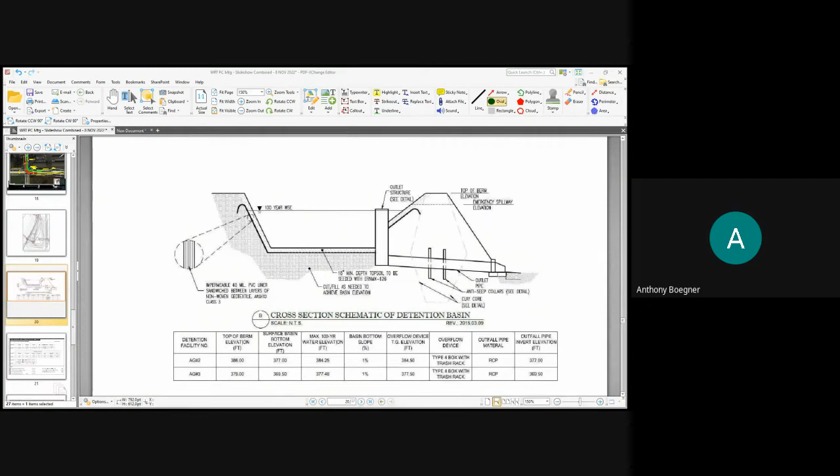Is my question. Just to clarify, we're not changing the inlets on the other side of the street. This overflow, the elevation over the 100-year storm, goes into the existing outlet pipe. Should a storm event actually exceed that 100-year storm event, and I'd qualify that we actually added 18 inches to get above that 100-year event, or we're committing to do that, just to add additional redundancy. Correct me if I'm wrong, Matt.

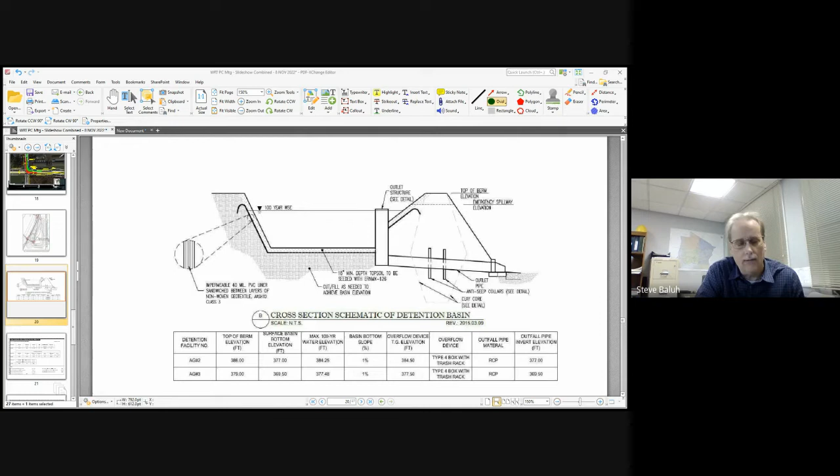The stormwater design on the north side, actually on all three of the basins, is designed to discharge a relatively small percentage of what the pre-development flow is. Is that correct? At least as the rate of flow. Yes, in terms of rate, you're 100% correct. And what Ryan had noted earlier, a lot of that volume is getting recirculated back into the site through the pump system that we have for the spray irrigation. So you're taking a percentage of that water, pumping it back into the site, allowing it to infiltrate more at the surface level than at a deep level directly from the basins themselves.

So yeah, I also agree with your statement, Steve, that this is a typical design, but we have built in some additional factors of safety here relative to the additional storage above the 100-year event, if needed. And just to go back, I made a comment earlier that we would need an NPDES permit. This project actually received an NPDES permit back in, I think, August of this year. So in terms of their review of the stormwater, that has been addressed with the Conservation District and with DEP.

So I imagine, depending on what the final design is here and any modification, you might have to do a modification to that permit for the final plan. Yeah, I would think that there'd be a very minor amendment to any final plans that we have here, at least as a matter of course providing them. But if our stormwater design itself has not changed substantially, then typically there's not much of a review in that regard.

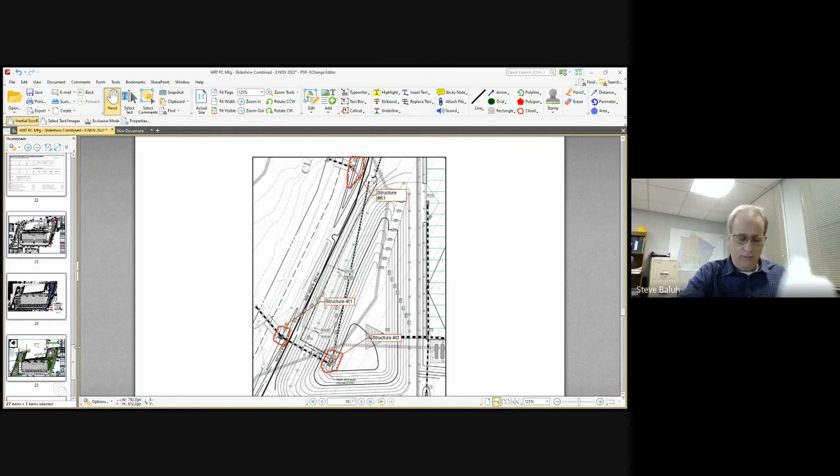The other three comments in my letter aren't waivers. They were discussions of those other points that Veris was making. So just to touch on them again quick, they believe they've improved the buffering between the residential properties by modifying some grading to get the berm and the sound fence in, plus adding the sound fence on top of the wall facing Clymer Ave. So I think the questions there are, ultimately they're offering the township the ability to pick the design of the fence and possibly the retaining wall also.

Number 9 was the dimmable light system, which seems to be an improvement over no controls on the lights. And the last was what we talked about before, the cut fill, the balancing of the site, so there's not a need to import or export an extensive amount of material from the property. So I think from a waiver standpoint, we have consensus on all of them except the contribution in lieu of parking areas shading trees.

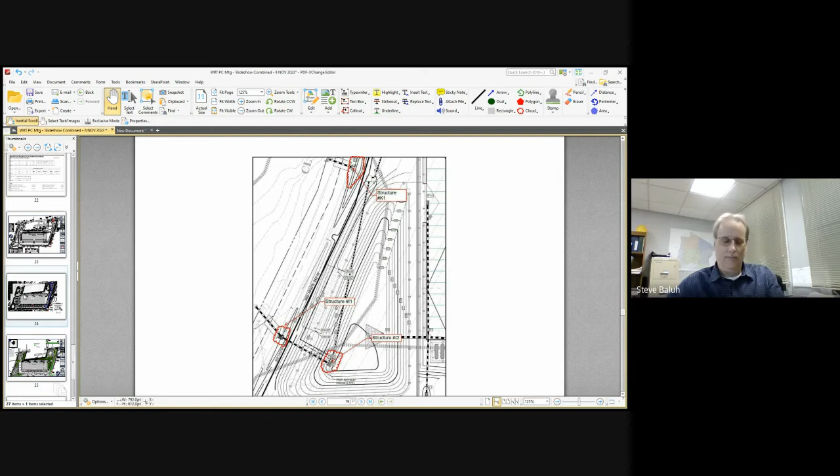And I guess I'll give you one other option. As you're just a recommending body, while you've always made definitive recommendations to the Board of Supervisors, you can pass an option onto them to make the final decision. They're obviously making the final decision anyway, but your recommendation could be no decision on that item, or whatever it may be. But I'm just saying, if there's only one item that's hanging you up, you can move a plan with that one item.

That said, we're in a little bit of a weird situation in that they didn't submit a fully revised plan because township staff and the applicant wanted to concentrate on these questions, which would be a major impediment to not have these answers. So I'm not exactly sure what Veris was hoping to get out of tonight, other than this feedback that you've received from the Planning Commission so far. What are your thoughts on that, Ryan?

Can I ask a question before that? And I don't mean to belabor the shade tree discussion, but we talked about planting this area with trees, and my read of the ordinance is, if these aren't over pavement, these don't count towards our shading percentage. Not opposed to adding additional shade trees. I've got a couple ideas on how we can even add more, but they're not going to be directly over the pavement, which I believe is the way the ordinance reads. Is that how I understand your interpretation?

You're correct in the interpretation of the ordinance. I think where the Planning Commission was going was that on other projects, they've given some leeway to planting trees in other areas on the site. I think that's where the question came from. And that's where I'm hung up on it, is that I think our fundamental issue here is planting trees in the middle of an active truck court, versus planting those in a green area of the site. But I don't know, it's different for afforestation versus parking lot shading or shading of the pavement. I think I follow your reasoning behind that, Steve, but that's what I wanted to understand.

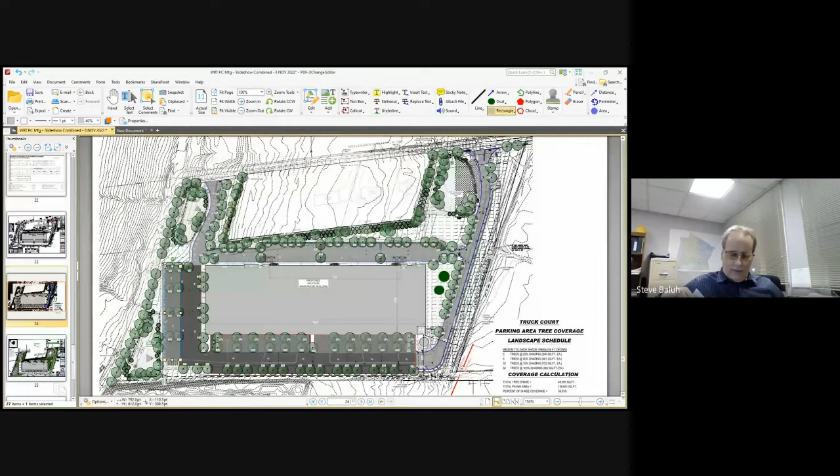So the last full review letter I have, I was scanning through it, but you know, most of the comments revolve around these waivers issues. And what the township's opinion is on the buffer plan. If you remember, that was always a major concern of the township, was buffering of the residential properties. Sure.

Beyond that, we have the issue of water line approval from Telford Borough Authority, sewer approval from Telford, and the sewage planning module, which they've submitted the paperwork. We've held it up because the township generally doesn't pass on a planning module to DEP until we have some level of plan approval. The traffic study and the improvements at the intersection of Meetinghouse and State Road was a major item. We've made progress there. We have the feedback from PennDOT. We have their commitment to the right turn lane.

The improvements along Meeting House Road was a major concern. I think we've talked through that extensively tonight of what they're offering to do. Stormwater management is essentially done. Landscaping, that goes back to the waiver questions. Did we ever get the generic report from our traffic folks? They were gonna put together something incorporating this project and some others that are being proposed.

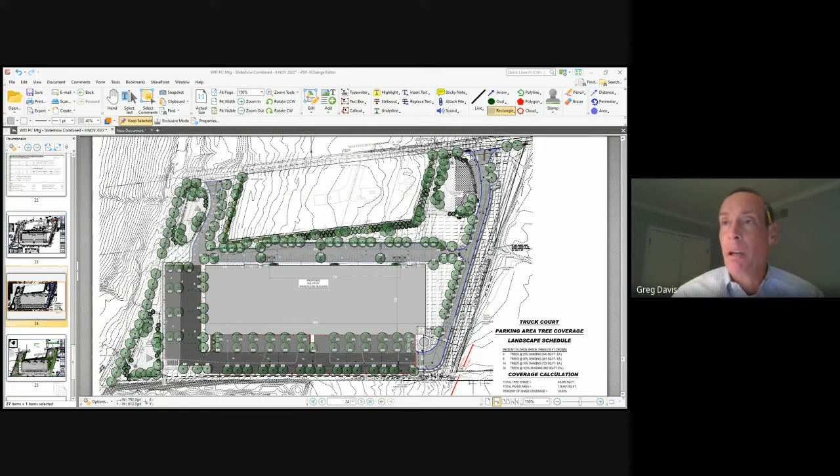Steve, to piggyback off of that, I don't want to speak for anybody, but I guess we're in a spot now where we came into tonight's meeting hoping for a recommendation on our preliminary plan. I think we made a ton of progress. I hope others agree. I think what we're left with undecided is the shade tree solution. And I guess one of a couple of things. If we could get some direction on that, in terms of a recommendation, something the planning commission would be satisfied with, and come back and show the planning commission.

That's one option. The other option is proceeding to the supervisors with maybe not a firm recommendation, I don't want to call it a non-recommendation, but suggesting that the supervisors take it upon themselves to consider what's appropriate in the absence of a clear recommendation from the planning commission. We could go in either direction. We've taken up 3 hours of your time already tonight, and I hate to do that to you again if we can avoid it. Right. Yeah, I mean, I'm sure we can figure out the trees. I don't like passing the buck. What were you gonna say, Steve?

I was gonna say that I think we need to clarify one other thing. In the past, Veris had distinctly requested an action on preliminary final plan at one time. If we're truly looking at this as a preliminary plan, which then gives you the opportunity to clean up some of the final issues later, that parking lot tree issue could get pushed to final if you were going to move on it as just a preliminary plan. I will say that I previously requested a preliminary plan approval and I was rudely interrupted by one of my colleagues requesting preliminary final. So to clarify that, preliminary plan unless you have a strong disposition, Greg, otherwise.

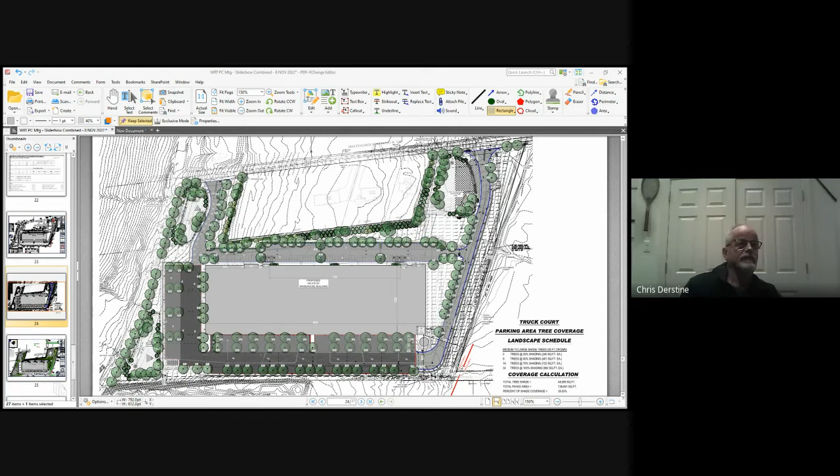Yeah, I follow you. Yeah, John, this is Tim. I would tend to agree with you, John. It's not the point of the shade trees making sense where they're going. I get that. It doesn't make sense, and I don't think they should do it. My point was the one way to accommodate it more would be to reduce the size of the building. And I think that's the whole point of anybody talking here about trying to get towards that 35% number: the one way they could get closer would be to reduce the size.

I think their efforts on everything else have been commendable. I think they've done a great job from what we were asking for, buffering, that type of thing. But that's my point. I would go along with what you said though about the best efforts to get towards that, and at that point accept the fee.

But maybe I'm misunderstanding. My interpretation is, even if there was no building here, only a parking lot, in order to shade 35% of the parking lot, you have to plant trees in the middle of the lot, which doesn't make sense. Yeah, it's independent of islands, building and or not. Right. Because we've already said if you plant trees elsewhere on the property, they're not shading the lot. They would count for the reforestation clause, not for the parking lot shade tree clause. Right.

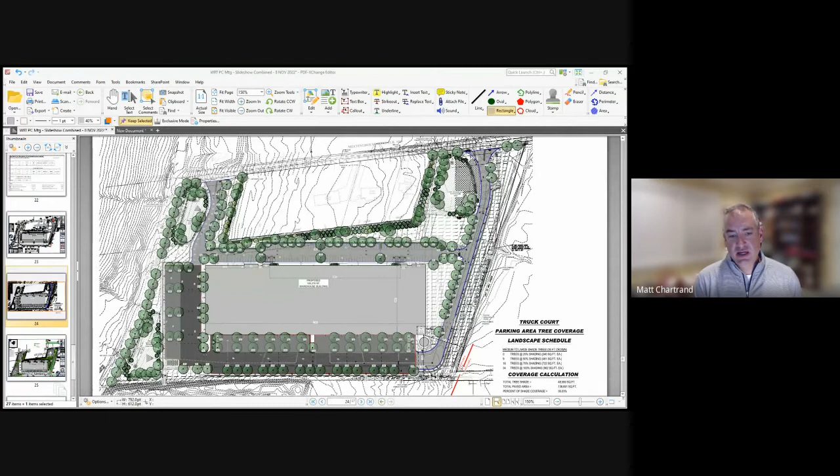You know, Ryan had made a comment earlier, but would it at all factor in if we did the areas that he had overlaid and shaded there in terms of where we could put concrete along the loading areas and the truck parking areas? You could visually look at it and see that it's well over 35% of the truck court, if you want to call it that. Eyeballing it, it's probably closer to 40% of just that area itself. If we were to agree to do that, in the spirit of cooperation along with the other work, would that move anyone on the board?

I guess to cut you off a little bit, Matt, I appreciate where you're going on that, but rather than calling an audible here, I like the overall discussion. I think you and I have a handful of ideas from this discussion, and we can come back with a best efforts plan that improves that and meets the intent of the ordinance in terms of heat island effect reduction, adding additional trees on the property. But I want a chance to discuss that with you and actually submit something in writing versus an audible, if that works for you. Yeah, no problem. I apologize. I was just interested in trying to get feedback on it, but I agree with you, Ryan.

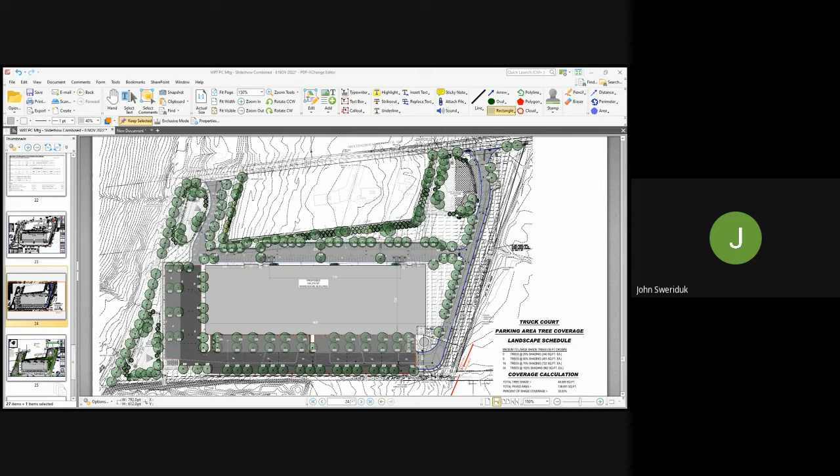All right. And I'll be reporting this to the supervisors next week, so they might have some input as well. If I could just comment, that kind of thinking is helpful. Even if you don't want to give us an answer today and don't commit, the fact that you're willing to go back and look at it is helpful. No, we've heard you loud and clear. So we will take another look at this. All right. So is everyone satisfied with that?

Chris, real quick, Ryan, if you could also provide again that exhibit on the traffic study at Meetinghouse and State Road that you provided. Yes. After we hang up, since I can't do it while sharing screen, I'll send you an email with both that concept plan and the traffic study, so you have it.

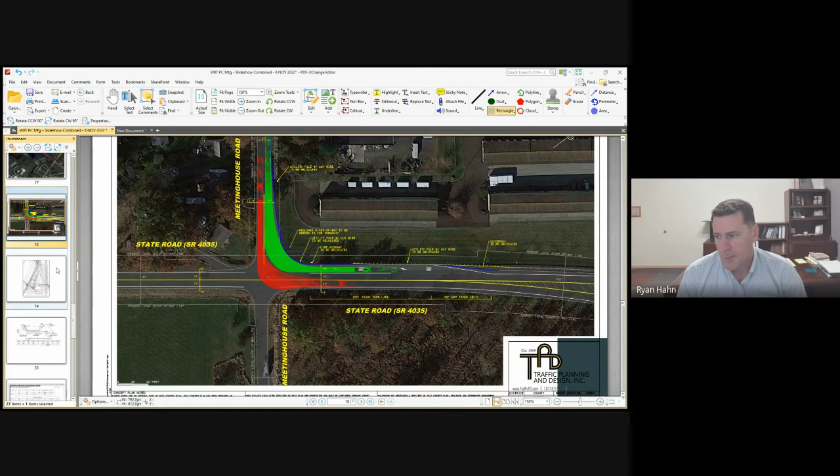Yes, if you could send it to all, not just me, all of us. Yep. Yes, please do that. Thank you. I've seen that before. I thought I had it in my packet here. It came out. We actually sent this going back April, May. So, but I'm sure we've all slept a few times since then. So I'll send it out. All right, thank you. All right.

So planning commission members, are we satisfied with the discussion, the route we're going to take here? So just to clarify, Chris, that route is we're going to wait for a plan to be resubmitted, a preliminary plan. Well, I think we can recommend a preliminary, a conditional preliminary, from what I understand here. I just wasn't sure if we don't actually have a plan, or are we just working off the old plan? That's what I'm trying to understand.

Well, I think you could work off the old plan, right, as modified with the exhibits that we recently submitted. And to get past that shade tree issue, maybe, Chris, maybe if we could satisfy, I don't know, to Steve's satisfaction, to the Board of Supervisors' satisfaction, with a notation of what we intend to do to modify the plan to address the shade tree issue.

Well, again, if we're doing this as a preliminary plan, I think the Planning Commission has a lot more leeway to have a few vaguer issues, because you're going to see it as a final plan, as a final cleaned up plan, to verify that all those issues have been addressed to your satisfaction. So to answer Alex's question, I'm more comfortable with it being a preliminary plan, acting on the last version we had with their commitment to comply with all the issues, except as amended tonight. The final plan, I wouldn't necessarily have that same opinion.

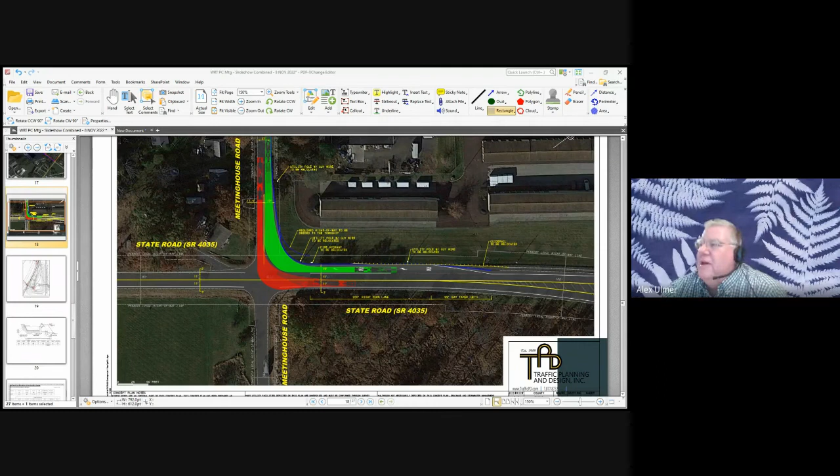As a matter of protocol, we should take public comment before voting on a recommendation. Thank you, Mr. Chairman. I was going to suggest that too, because there's a lot of people that have a lot of comment to make about this project. Thank you. You're welcome. So here's what we'll do. We'll make the motion, second the motion, then we'll have public comment before we vote on it. One thing I would ask for in the public comment would be if any of the adjoining neighbors have any thoughts on the screening wall. I'd be curious to hear what their thoughts are with regard to the type of wall. Right.

All right. So somebody want to put a motion together? Would be a conditional, recommend conditional preliminary. This is John. I'll recommend conditional preliminary approval. Can I get a second? This is Alex. I'll second it. All right. So now we'll open up for public comment. Greg, do you have any email? Yeah, John Romeo. I don't know if he wants to speak or if he wants me to read it. I guess I'll read it.

John Romeo. A comment, obviously surrounding residents will not be able to exist in their homes as planned when purchased due to light pollution, truck noise, traffic, and diesel fumes. After hearing monetary contributions in this meeting multiple times, I have to ask, do you ever offer monetary contributions to the surrounding residents for having to give up the peaceful, quiet surroundings that they now have? Also, if there's no room for the required amount of trees, it seems obvious the project is too large and needs to be scaled down.

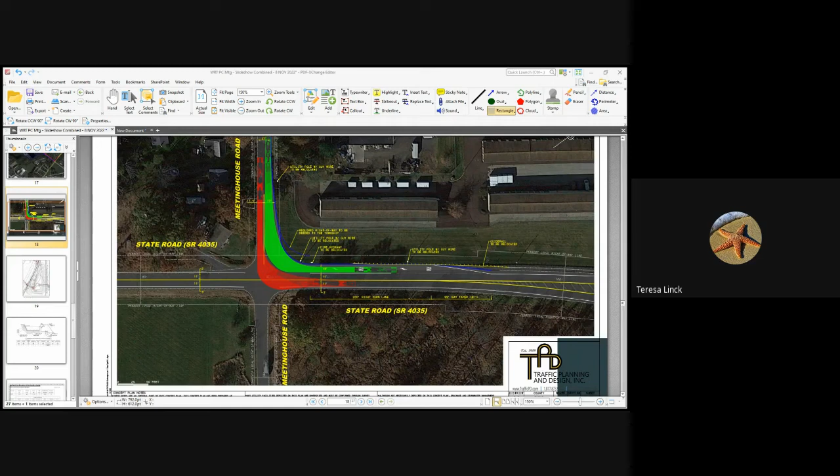Then they have to go down to Quarry Road and make a right onto Quarry Road and then go up Clymer. So I'm very concerned with the width of Clymer Road because it is near impossible to pass two small vehicles on that road right now, let alone a truck and a car, or two trucks even, with all the other buildings that are happening. That's it. Okay, thank you.

Anyone else? One raised hand. Yep. I went to hit mute. Thank you. All right, anyone else? Okay. Seeing none, we have a motion on the floor. It's been properly seconded. Any further discussion between planning commission members? Hearing none. All in favor? Aye. Aye. Aye. Aye. Aye. Opposed? Motion carries.

So, Ryan, I guess I'll report that we're recommending preliminary to the supervisors next week. You guys are going to do your homework, get some things cleaned up, and come back with a shot at preliminary final, or at final at this point. We appreciate the time and comment, and we've got a list of additional items to address, not only from the Planning Commission, but the resident comments. I appreciate everybody taking the time. Yeah, well, please do take those neighborhood comments into effect. All right, anyone else? We're actually going to move on.